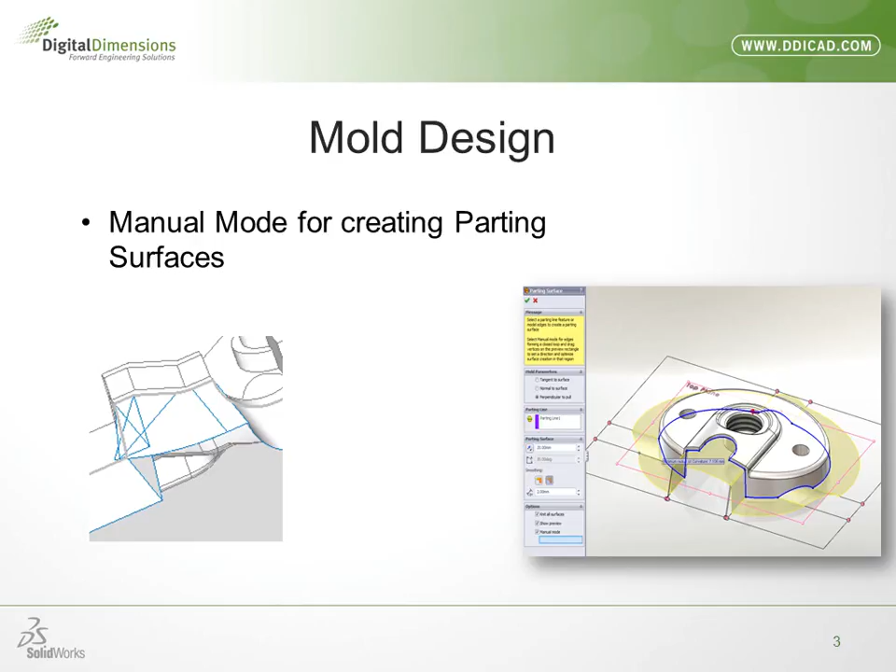Okay, so in older versions I really wasn't allowed to change or modify the surface much. With this new manual mode, it allows me to really grab and pull on it and make something that is truly custom. Okay, so let's go ahead and get into it. I'm going to call up a part here. And I have a parting line already established, just unsuppress it. I'm going to go ahead and call up the parting surfaces command.

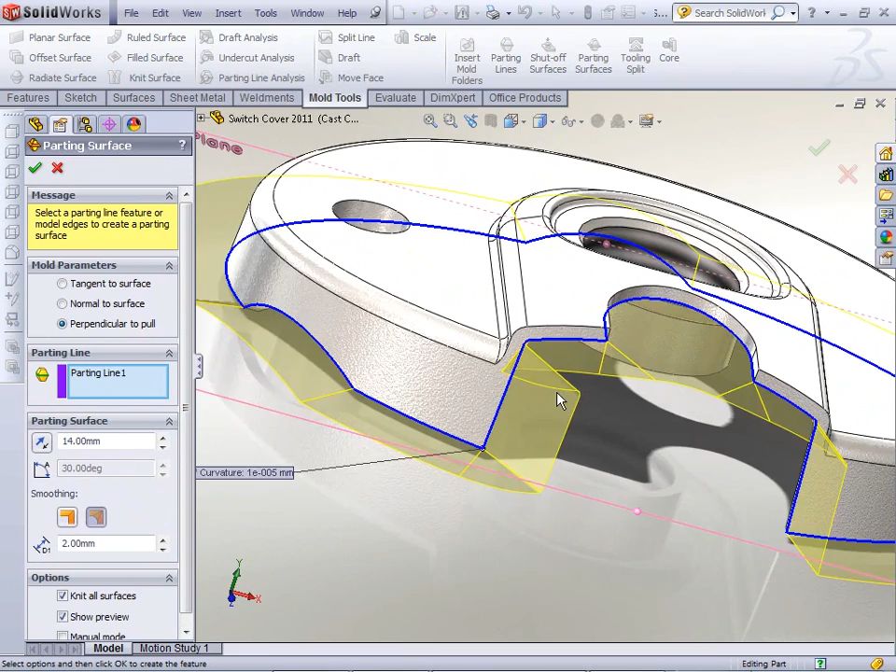Now in the past, with manual mode off, what you would see in a part like this is a really odd surface in a few particular cases. And you'll see right here where the surface is almost folding over on itself because of the geometry in here. And unfortunately, in older versions, this is what I was stuck with. This is what I had to use. In other words, I would have to go in and really do some real surfacing techniques to clean this up. And so there was really nothing I could do inside the parting surface command.

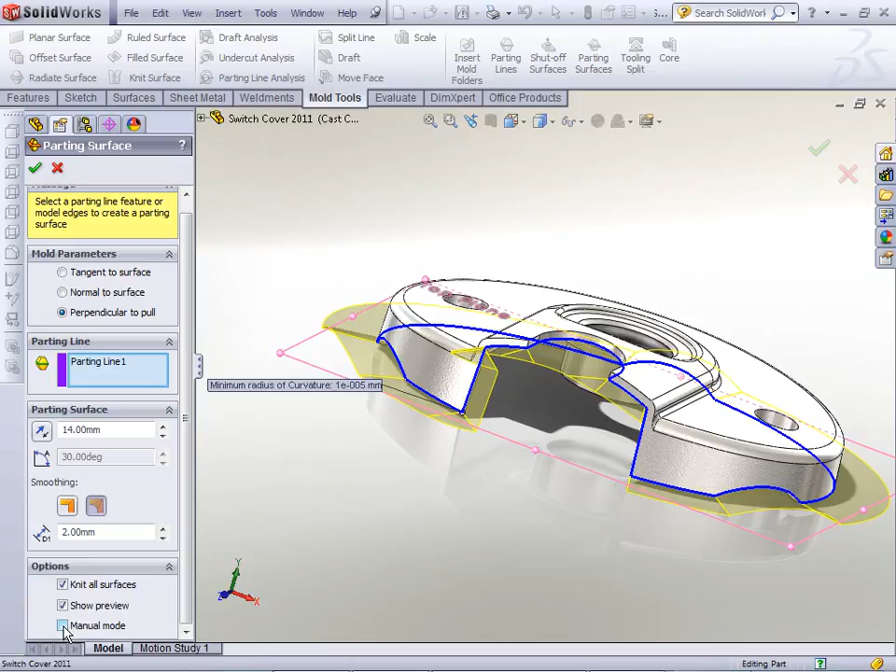With 2011, they've created this new option here at the bottom left in the feature manager. It says manual mode. I check the manual mode, and you'll see what happens is it pops up with a bounding box around the model and a bunch of little pink dots, and these pink dots represent vertices along the split line. They line up with vertices along the split line, and all I have to do to change the model is grab these pink dots and drag them to the alignment position that I prefer.

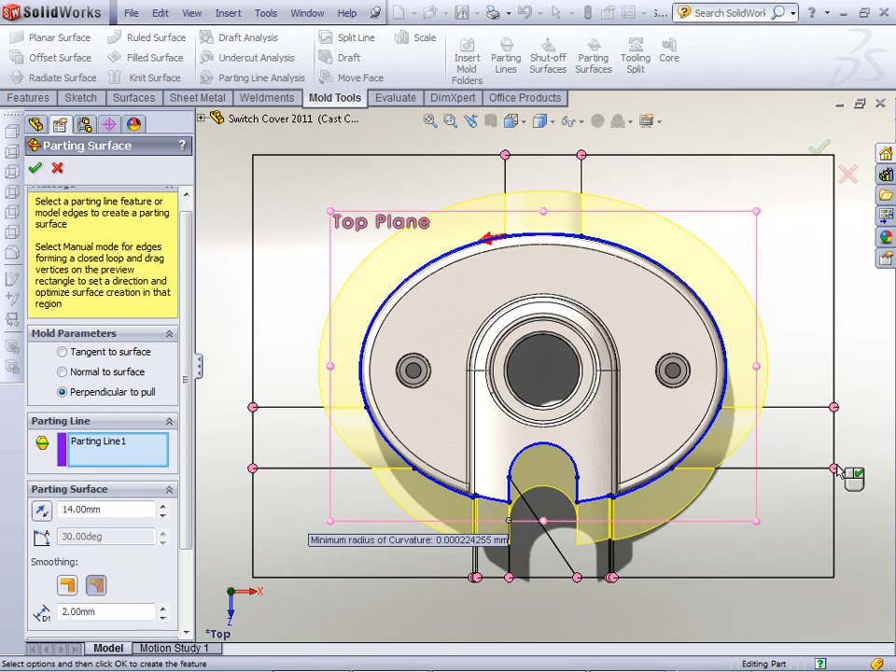So let's say I don't want it vertical, I want it horizontal. I can drag it, and you'll see it kind of snaps to the horizontal orientation, and that reorients the surface. Okay, do the same thing over here. You'll see it snaps into place right at that horizontal position. But again, it allows me just a little more control over the surface that I couldn't have done in previous versions. You'll see that takes that twist out of the surface.

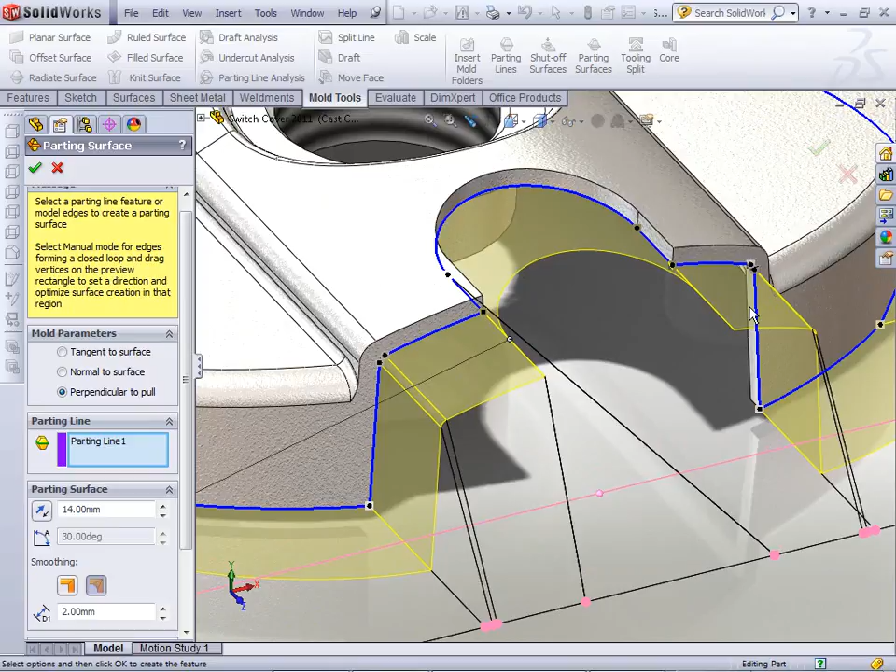The other thing to note is we've created a new command for fill surface regions. So in a situation like this where I have this half arc, for instance, instead of having the half arc open like that, I want to continue a surface from here to here. All I'd have to do is start and end a fill surface region. To do that, you'll notice these little black dots all along the parting line. Those are all locations where I can start or end a fill surface region.

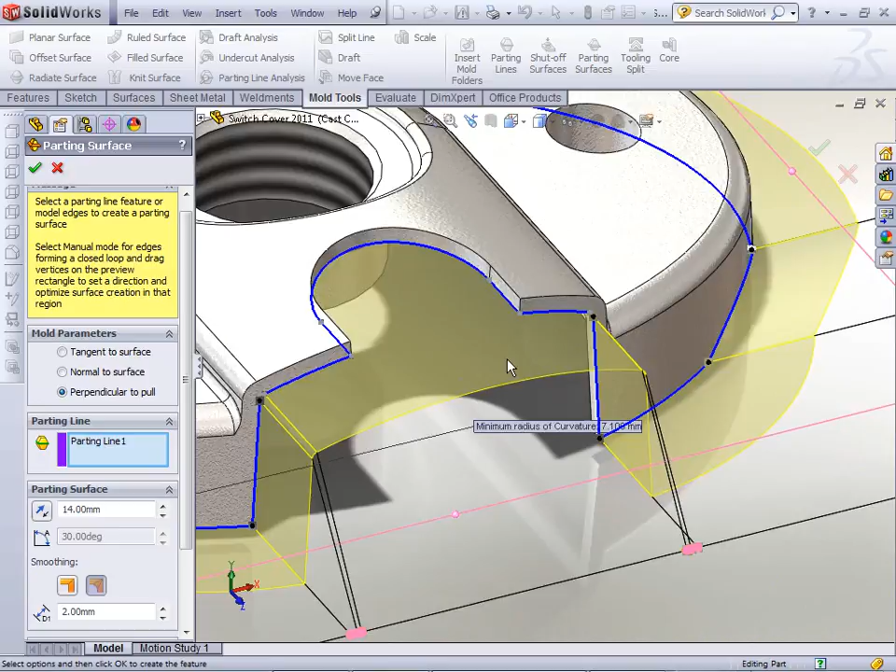So what I'm going to do is come over here, right click on this dot, and this is where I want it to start. So I right click the dot, and you'll see a button here that says Start Fill Surface Region. So I select Start Fill Surface Region. I go to the place where I want it to end, which is this right here. Right click it and say End Fill Surface Region. And that'll create a continuous surface from this dot to this dot. So again, a little more control inside the parting surface command, which was previously unattainable. So that's pretty much it for mold design.

Let's go ahead and get into sheet metal. A couple of minor changes, but they aren't really minor when you consider the workflow and the day-to-day use of SOLIDWORKS. They are pretty major. And a big one is the ability to mirror and pattern. In the past, we could not mirror or pattern edge or miter flanges, and that's no longer the case. The issues always stemmed from how the model handled the bend information for the mirrored instances. So that's taken care of for 2011. It's no longer a limitation.

They've also introduced this concept of a bounding box, which I'm going to describe here in just a couple of minutes. They've made some enhancements to convert to sheet metal, to make it a little more uniform among all the sheet metal tools. And then lastly, there's been some updates to the flat pattern command. I don't have a lot of details on it, but I'll explain some of them when we get to that point. So let's go ahead and get into it. I'm going to go ahead and call up a part.

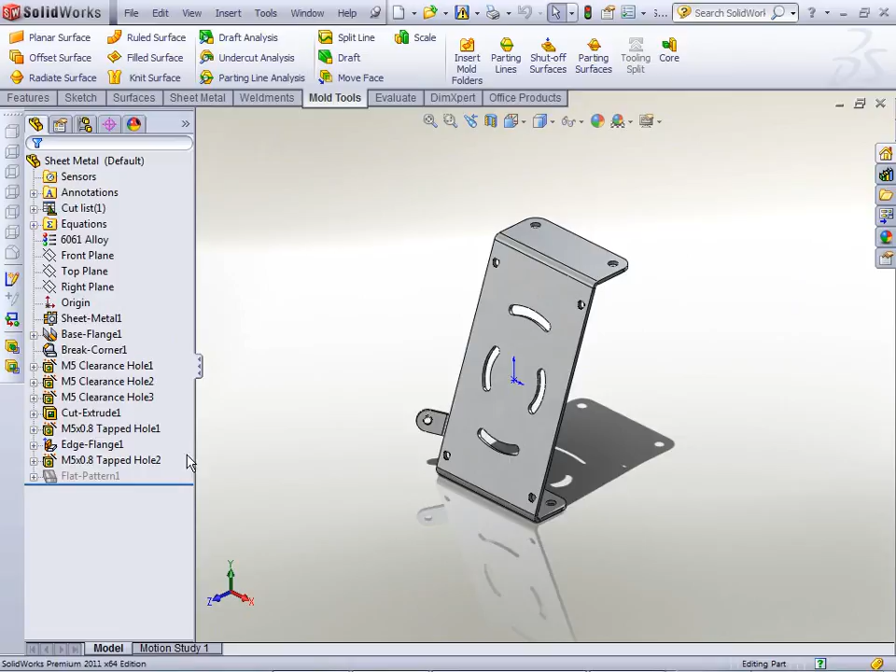And the first thing I want to start off by doing is just showing that we can now do a pattern of edge flanges. Now, not only edge flanges, but custom edge flanges. You'll see here this is a custom edge flange that's been sketched. It's not anything I just grabbed and pulled on. It's been sketched out and laid out very specifically. And in the past, the limitation is we could not do a pattern of these. And that's no longer the case.

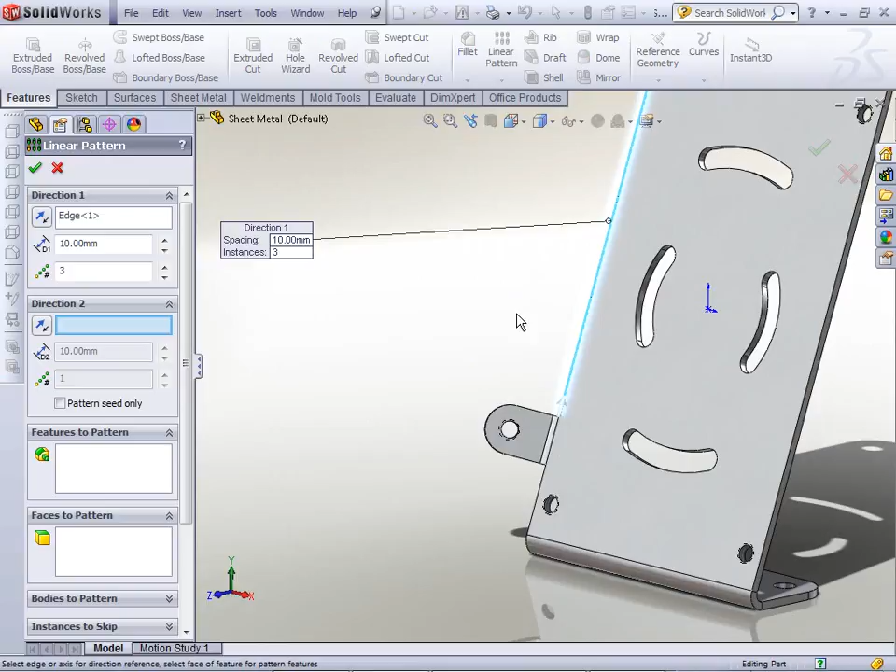I call it the same linear pattern, use the same techniques I'd use for any normal feature, so there's nothing specific sheet metal about it. And then I just select the two features I want, in this case the edge flange and the hole going through it. I set that, I set my space, and I just hit OK. So the workflow really isn't any different than a normal pattern. You'll notice that the bend information is held as a child feature to the pattern. And that's one important thing to note. That's where the bend information is going to be held for those patterned instances.

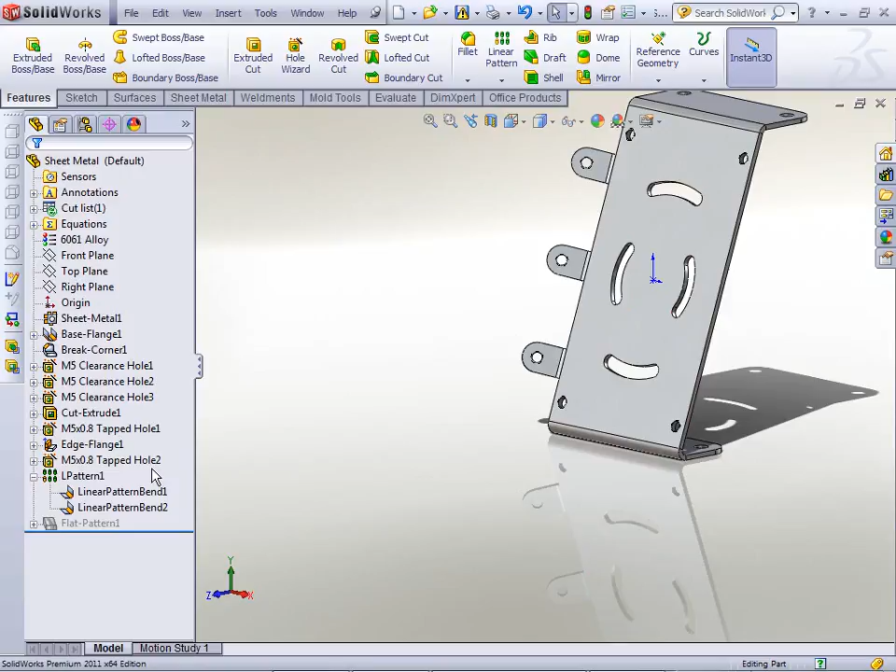Okay. Same thing goes for mirror. When I go to the mirror command, and I'll mirror about the right plane, just select one of the pattern instances. Notice that it picks up not only the pattern instances, but the seed as well. So I hit OK, and it mirrors as well. Also, bend information held underneath the mirror command. You see that. Child features of the mirror command. Okay, so both pattern and mirror supported for edge flanges and so on.

Okay, and obviously the important bit when it comes to working with sheet metal is the flat pattern and the ability to work with this flat pattern. What they've introduced with SOLIDWORKS 2011 is a bounding box. And this bounding box, you'll notice, is just a construction line rectangle that surrounds the SOLIDWORKS model. And it's the smallest possible rectangle that will fit around the model. That's by design. And what's nice is, I'll show you in just a bit, we can also export this. So this could be used in a lot of different situations.

I think the most common would be in a manufacturing environment where I nest models. I need to know the stock size that I'm starting with, and that's an example of where I'd use this. But there are a lot, and I'll show you later on how we can export this out when you're exporting your DXF and DWG files. But there are a couple things I want to point out about how SOLIDWORKS handles bend information. The first thing I want to note is just the length of this overall model. Now if I click on the bounding box edge here, it gives me an overall length for the flat pattern, which is 190.74.

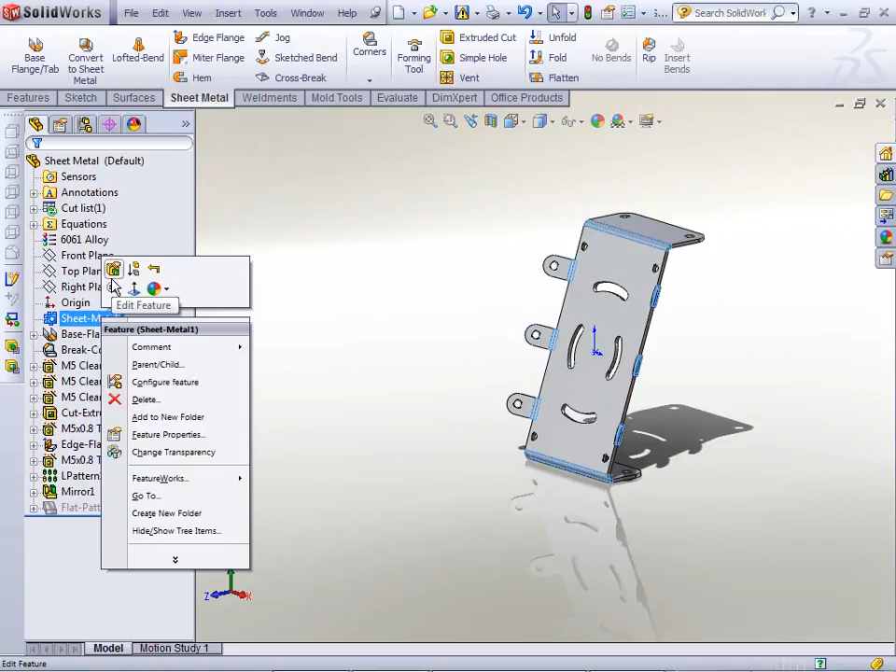By default, the bend information is stored as a K factor. Okay, bend allowance information is stored as a K factor. And in the past, with difficult parts like this, where the K factor may vary because of the bend angle, maybe the bend angle isn't exactly 90 degrees, the K factor information, the bend allowance information, needs to change. And so, in the past, the only workaround really to using a K factor is going into bend allowance or bend deductions. And the problem with those is they can be kind of tedious to set up. They've created a quicker alternative, and it's called the bend calculation. And what it is, it maps to an Excel spreadsheet an equation that allows it to vary the bend allowance based on the actual angle of the bend.

Okay, so what I'm going to do is go back into the flat pattern. I want to point this out one more time just to show how this handles it. With a default K factor of 0.5, this is the overall length. See, 190.74. Now I'm going to change that K factor or bend allowance data to be mapped to my custom Excel file equation. So I'm going to set it to bend calculation. I have the bend calculation already set. So you'll see here. Now really all it is, I'm going to go ahead and call it up, is an Excel file.

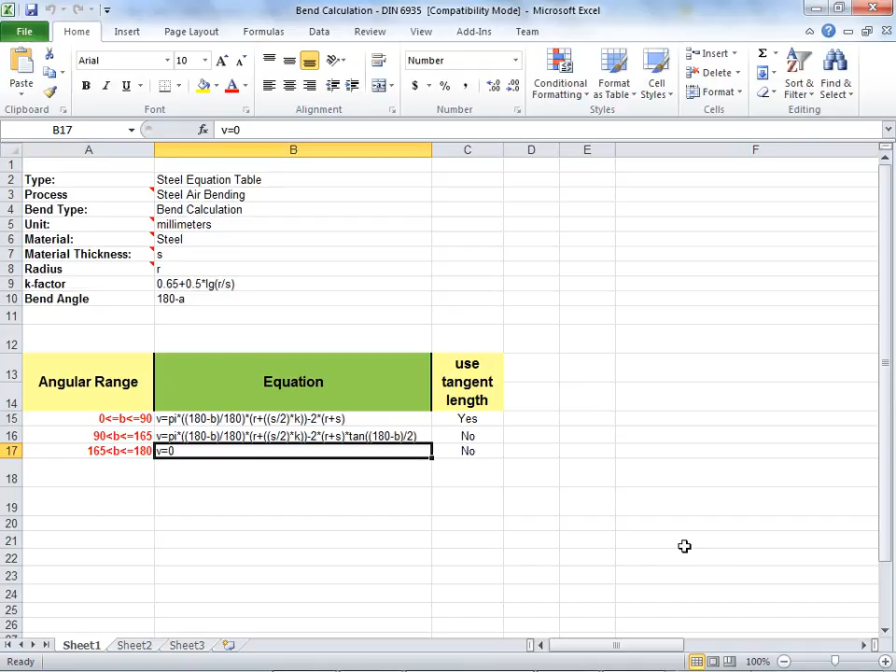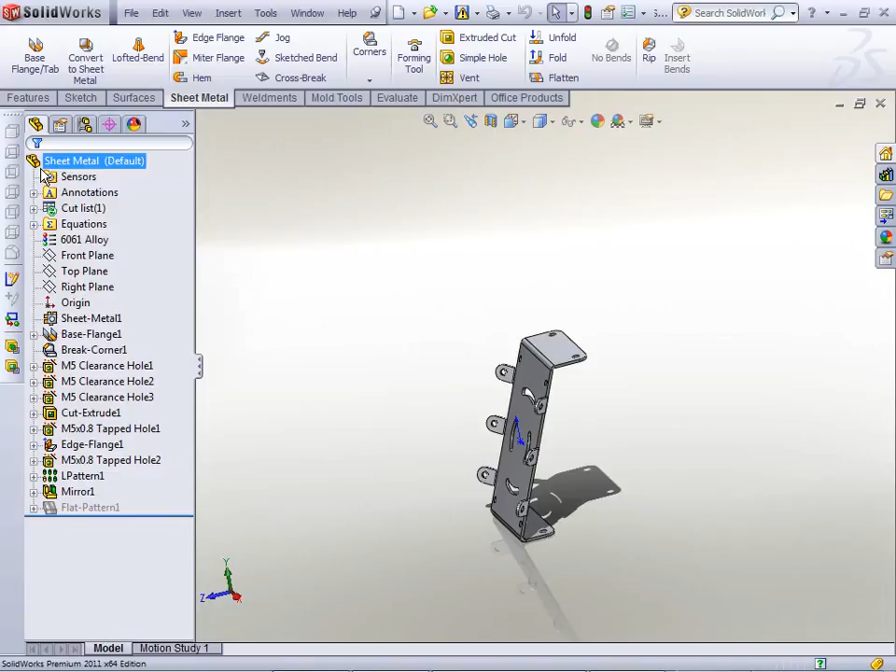Okay, so I'm going to go ahead and close this out, and I'm going to map this bend calculation Excel file to my part, changing the calculation based on the bend angle. So I'm going to go ahead and hit OK, it rebuilds the data, and you'll see it pops up similar to a design table. And now the bend allowance information is tied to that Excel file as opposed to just a default K factor.

And the difference really comes in when I show the overall length of the flat pattern. So when I click on this edge here, you'll see it says 189.64. That was before 190.7 something. So it's 1 full millimeter, or about 40 thousandths of an inch difference in just the bend allowance information. Now that may not be a big deal, but in certain cases it could. It could be the thing that causes it to have a failed model, failed bend.

So there are a lot of different situations for different K factors and even differences in machinery. So there are a lot of things to consider. But what's nice about that bend calculation is it allows me a really customizable setup where bend allowance and deductions were always kind of a tedious manual process.

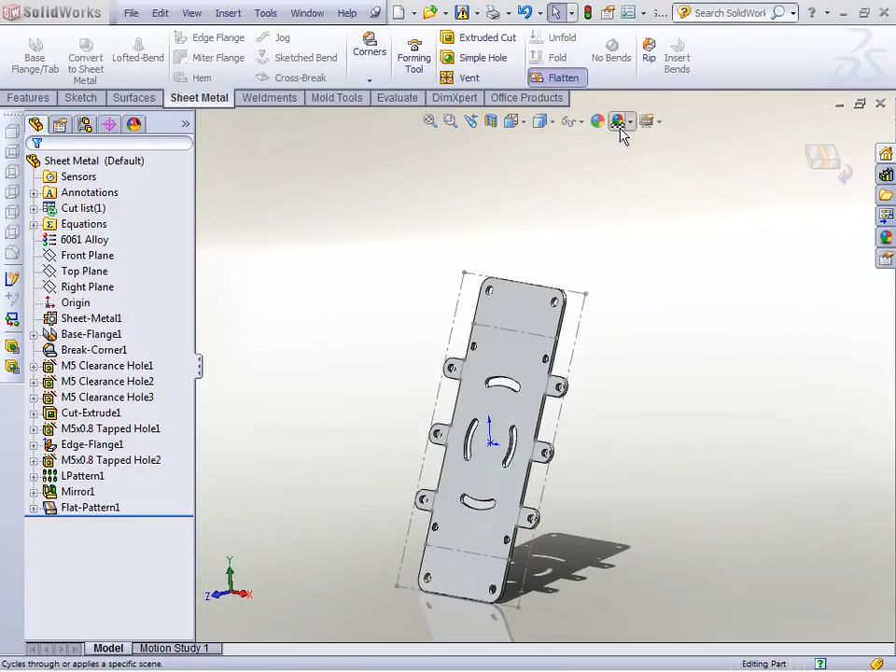So the next thing I'd like to go over, as I mentioned earlier, they've changed the way they handle flat patterns, and I want to show an example of how I can update my old models to reflect this new flat pattern update. So what I've done is I created a real basic model in SOLIDWORKS 2010, and I'm importing it for the first time into SOLIDWORKS 2011.

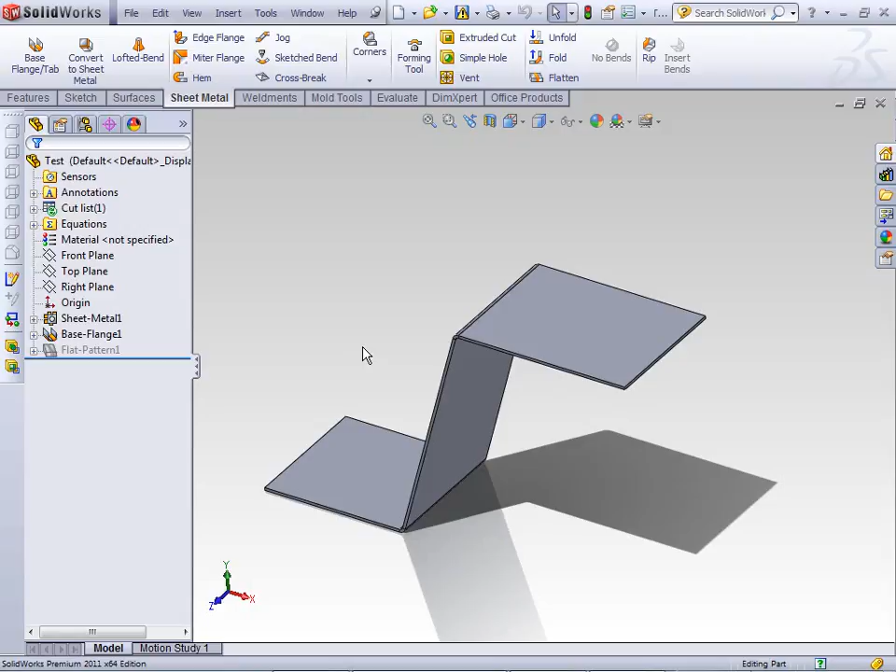And like I mentioned, they've made some changes to how they calculate flat patterns, and these changes support a lot more complex rip scenarios and a lot more complex lofted bends. And so it allows me to do something I couldn't previously do in 2010, which is flatten some of these more complex rip and lofted bend sections. So what I want to show is how do I update my model to reflect these new changes.

All I have to do is right click Edit Feature to the flat pattern, and if the model hasn't been saved yet in the newest version, you'll see this option that says Recreate Flat Pattern, and it recreates the flat pattern to be updated to this new version. And so what I have to tell people is open up your model in the 2011 version, recreate the flat pattern, and then try creating that feature that was difficult or impossible to do in 2010 and see if you still have an issue flattening it.

Okay? So that's the recreate flat pattern option. Again, this is only for files that haven't been opened and viewed yet in 2011. You'll see this. If you created it new in 2011, this option won't be here.

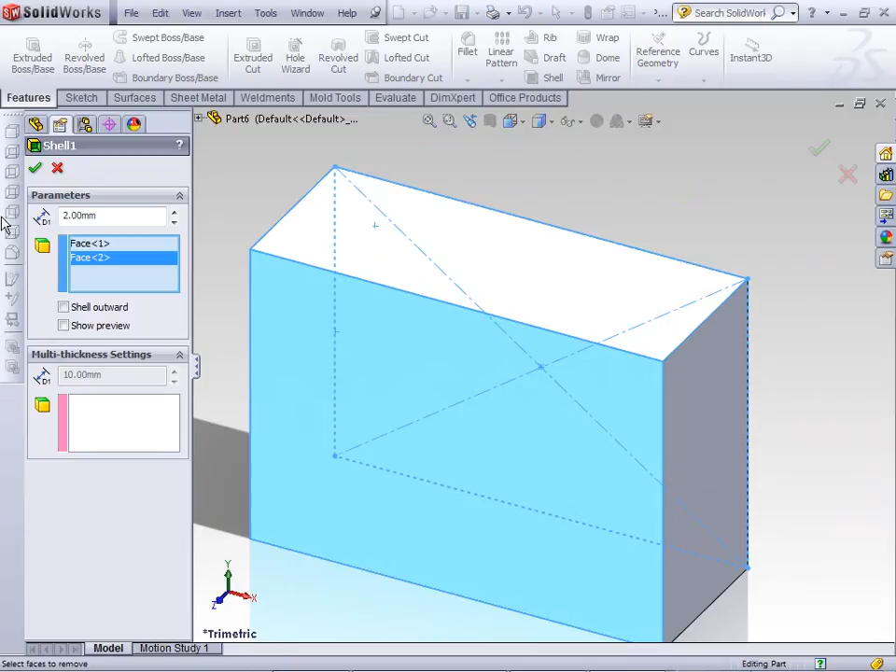Okay, there's one last thing I want to point out, and I can just create a part for this, and that's new functionality to the convert to sheet metal command. Just going to create a real basic block, and the limitation in the convert to sheet metal command is that you had to specify a thickness. You could not specify using a gauge table. Okay, you had to punch in a thickness, which was kind of different because almost every sheet metal command I can punch in a gauge as opposed to a manual thickness.

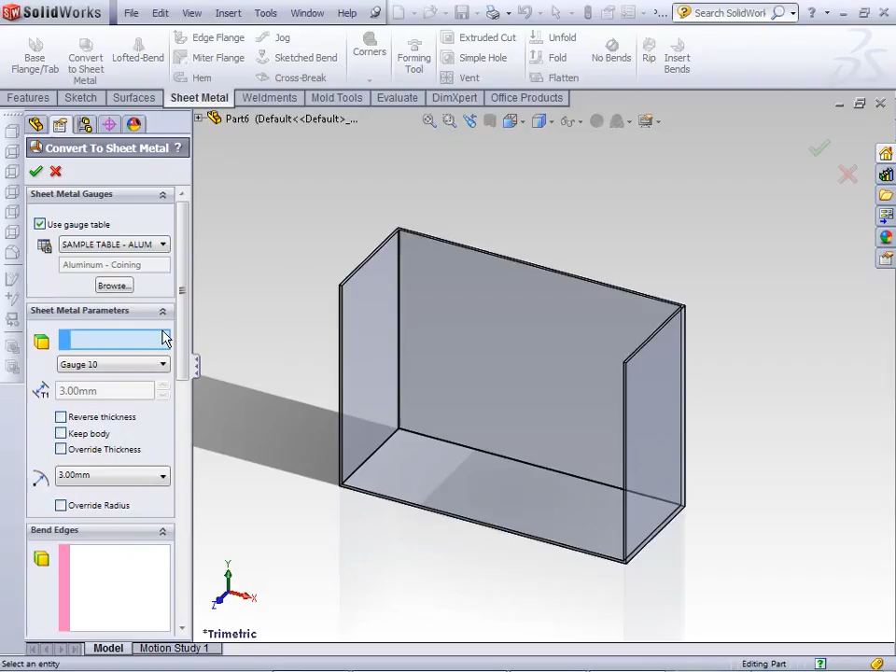So now it's a little more uniform. The convert to sheet metal now supports gauge tables, same gauge table set that I use for a base flange, for instance, and it works in the same way. Okay, so some changes to the convert to sheet metal command. Okay, so that about does it for the sheet metal.

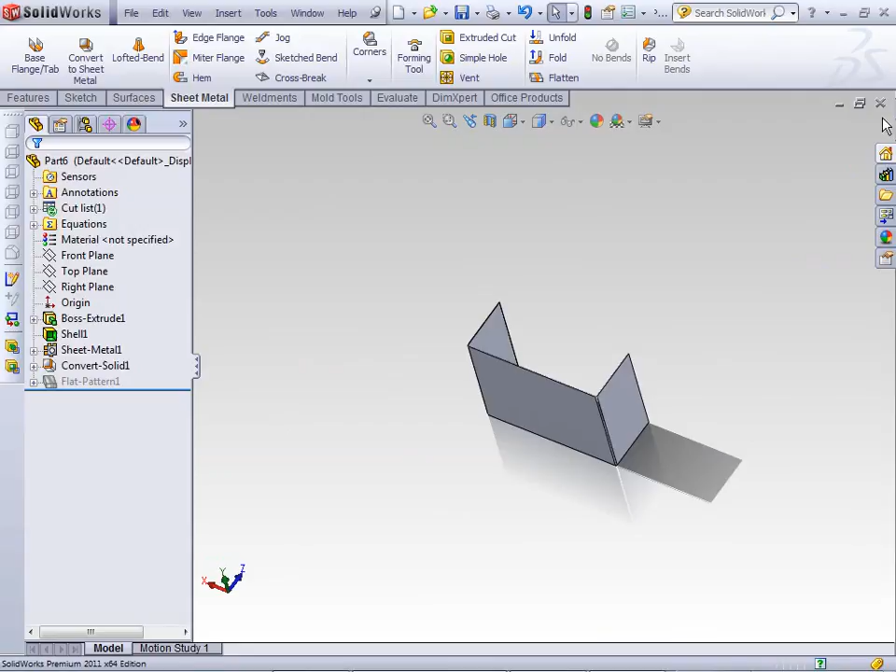The big change for 2011 in Weldments is the addition of the Weld Bead command. And the Weld Bead command is definitely much more powerful than its predecessor, the fillet bead. The fillet bead is still there. You can still create fillet beads, but I think once you've seen what the Weld Bead command can do, you probably won't be using it.

The other additions to the Weldment support are in drawings. The big changes in drawings, we've created a new table called the Weld table, which I'll show you in just a second. And also, Weldment cut list support and things like that have been updated and modified, so we'll get into those as well. Cut lists, some minor changes to cut lists as well, which I'll get into. So let's go ahead and call up a Weldment.

And the first thing I want to note is this is a part, but we're going to get into an assembly as well, an assembly Weldment as well. But I want to show this new Weld Bead command. Notice it even takes the place of the fillet bead on the Weldment toolbar.

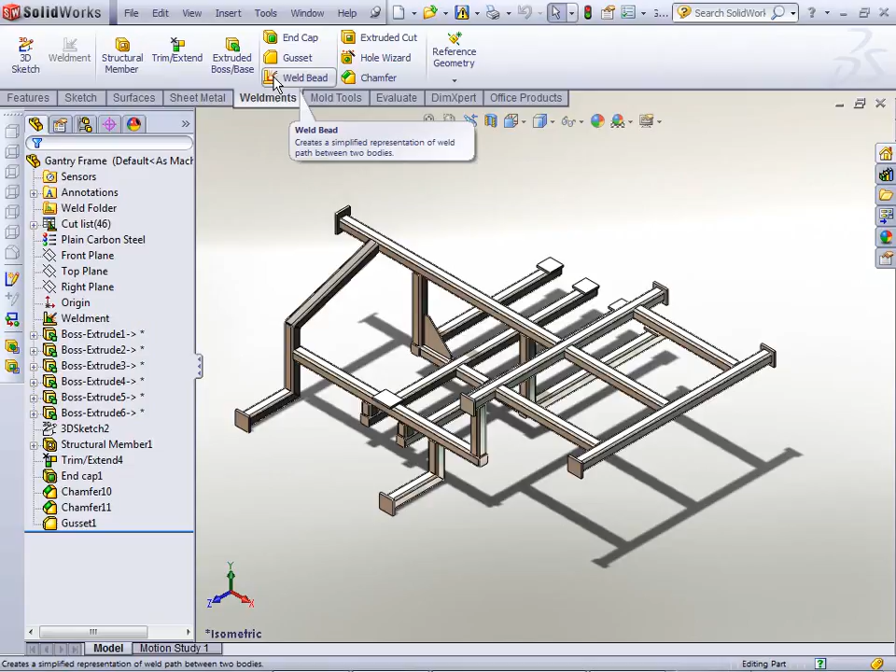It's not that your old fillet beads won't be supported. They'll still be there. You can still create fillet beads if you choose to. But this command is much more robust in how it works. So I just want to show some cases where old fillet beads wouldn't have worked.

So in 2010, if I wanted to weld this piece of square tubing to this at this angle like this, I couldn't have done it. The limitations were because it met at this weird angle, I couldn't create a fillet bead here. That's no longer the case with a weld bead.

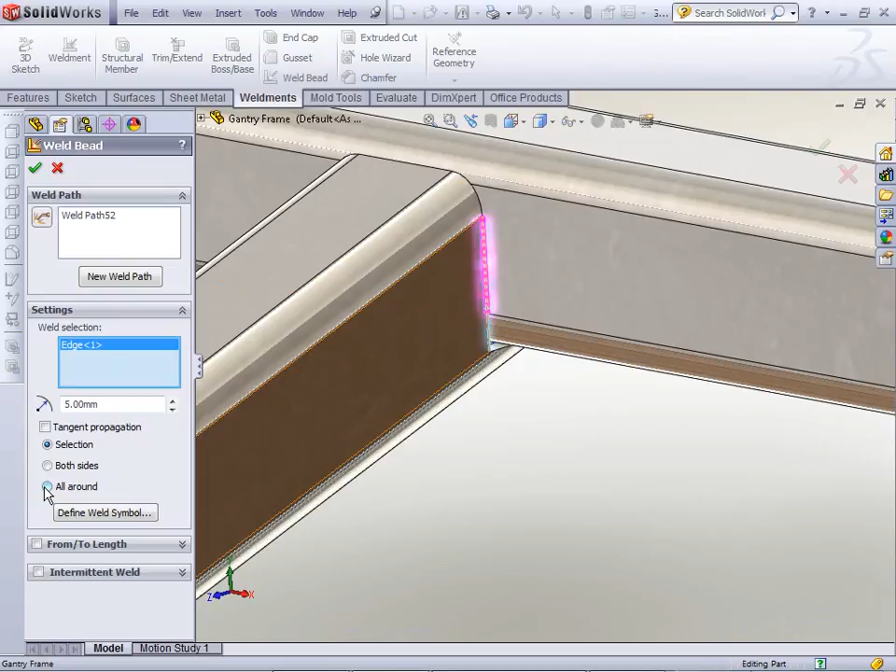I just select the edge I want to weld, say all around for the weld type, and you'll see the pink preview is my weld, and I just say OK. There's my weld bead. Okay. Again, a limitation in 2010, no longer a limitation in 2011.

Here's another one. Because of the radius here in the tubing, the weld wouldn't know how to handle the difference between this and the radius, and that was always a limitation with the fillet bead command, no longer with weld bead. In this case, I could just select two opposing faces. Now I could choose, in this case, and it may make sense, both sides. Say, okay, both sides of the tubing need to be welded, but not all the way around.

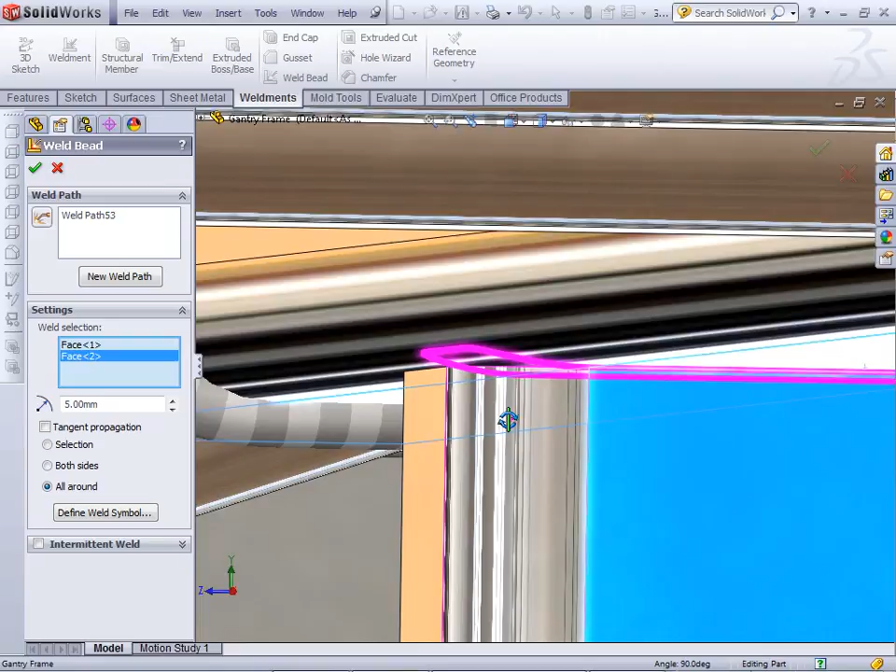But what's nice about the all-around is it'll actually compensate. You'll notice if I zoom in at the right angle here, notice how it actually ramps the weld up to accommodate for that radius. Okay, so definitely new functionality there.

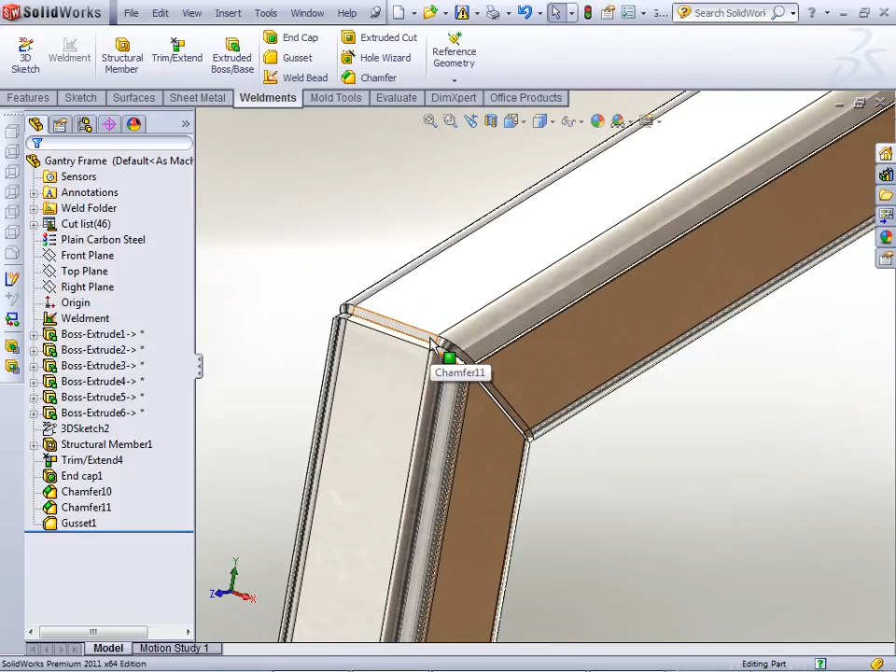Okay, so a couple others. If you actually did weld prep, and this always stumped me, if you actually went through the effort of adding the weld prep, the chamfers on the end of the tubing, you couldn't actually add the weld, and that was again a limitation of the fillet bead command. No longer the case for the weld bead. I select the two opposing faces of the weld groove and just say all around.

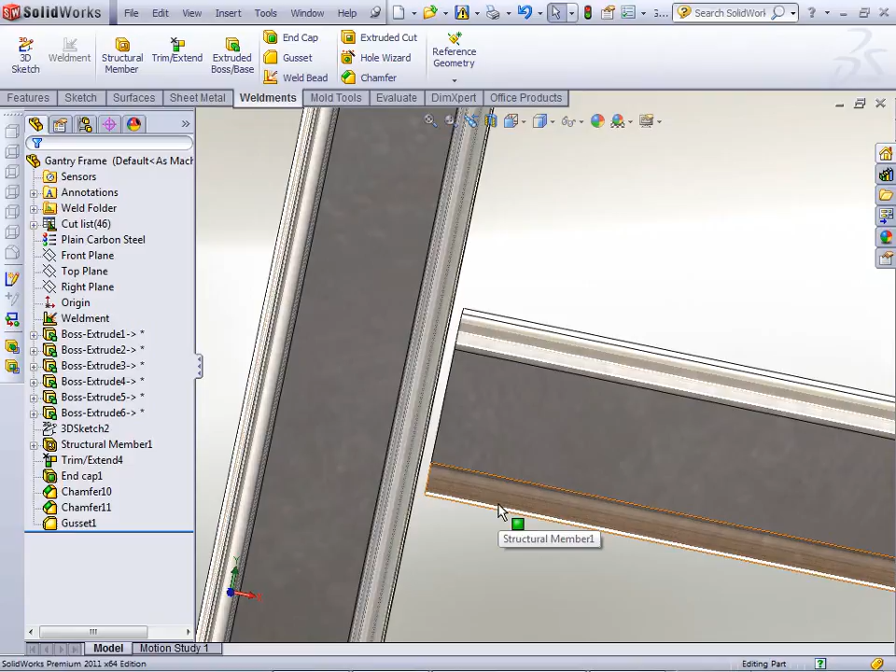Okay. Lastly, and one of my biggest nitpicks was gaps. They introduced the ability to add gaps either last year or the year before, but you couldn't actually weld the gaps shut. Okay, so now, again, no longer a limitation. Select the two opposing faces, say all around.

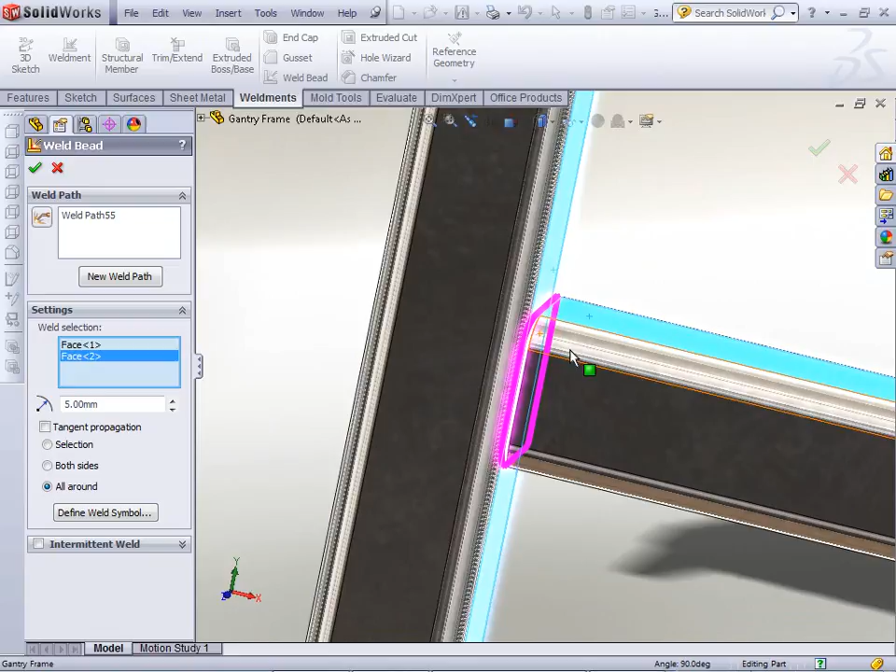One thing I want to note about this is it creates a virtual intersection between the two. Notice that the pink preview is not actually touching either face. So it creates an intersection between the two, and that's where it creates the weld, which is, I think, a lot of the limitation of the previous Fillet Bead command. So I have that, I hit OK, and there's my welds.

They've also introduced some new functionality, and I want to go over that as well. So in this case, I want to weld this gusset to the tubing. So I just select the two faces, and you'll see my pink preview show up. And I want to go over the option for an intermittent weld. You'll see it here at the bottom. And if I check this, it allows me to create intermittent welds as opposed to one solid bead.

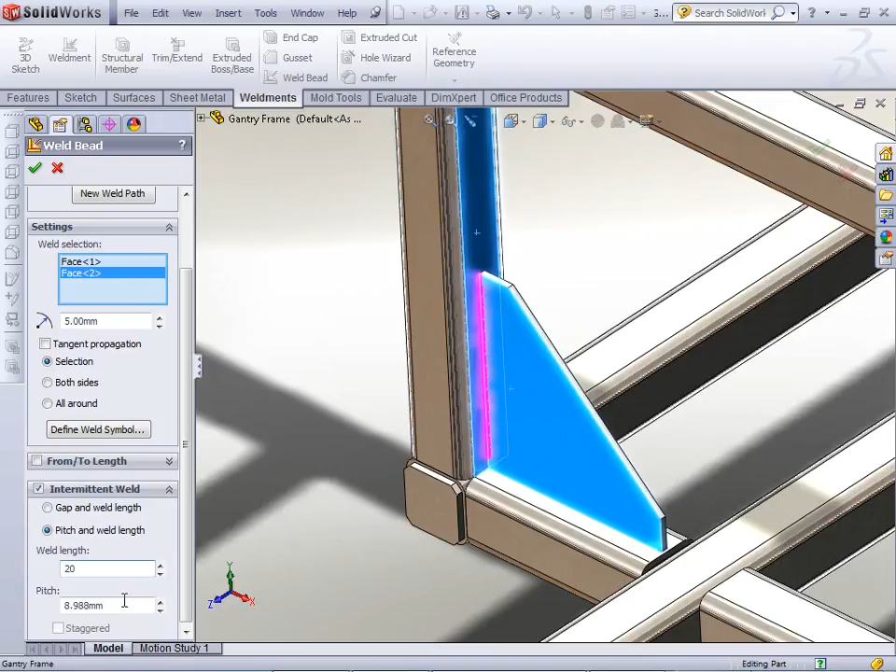So I'm going to set this to pitch and weld length. I'm going to set my weld length to 20 and my pitch to 30. And you'll see it creates an intermittent weld. Now I also want to duplicate this to the other side, so I'm going to check both sides. You'll see that puts it on the other side of the gusset as well.

And lastly, I want to stagger it on either side of the gusset. So I'm going to check the staggered option here, and you'll see it staggers it on either side of the gusset.

Okay, so that's an intermittent weld. Next one I want to go over is this from to length option. In the past, I was always forced to weld basically the length of the edge or the face that I defined by. And in this case, you'll see the preview. Basically, the weld length is the length of the model.

Now I can actually customize the length of the weld relative to its edge by clicking this from to length option. And what happens when I click that option, you'll see arrows pop up on either end of the weld. And all I have to do is grab those arrows and drag to manually change the start and overall length of the weld. One thing to note about the way this is defined is you're not defining the start and end length, you're defining the start and overall length.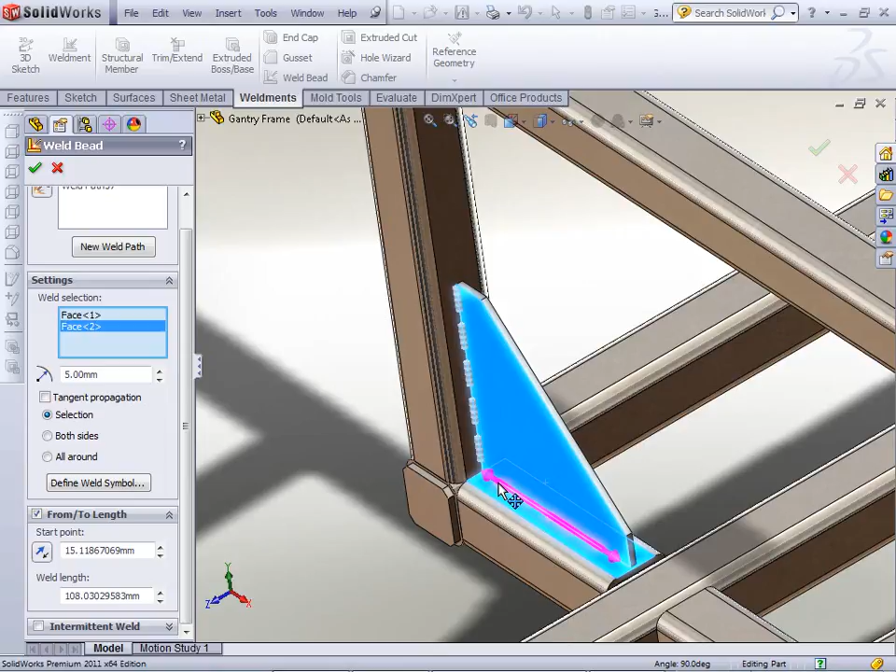And that's why when I grab on this now, I'm not changing the start and end length, I'm just changing the start and overall length of the weld. And so if I wanted to make the overall weld shorter, I'd have to grab this arrow and drag it. Okay. Just one of the things about the way it works. I'm also going to check both sides here because I do want it to weld on the other side of the gusset. And I can just hit OK.

Okay, so that's intermittent welds, from to welds, two new options in the new weld bead command. Okay. So I want to take the opportunity to show some of the enhancements to assembly welding as well. I'm going to go ahead and open up an assembly.

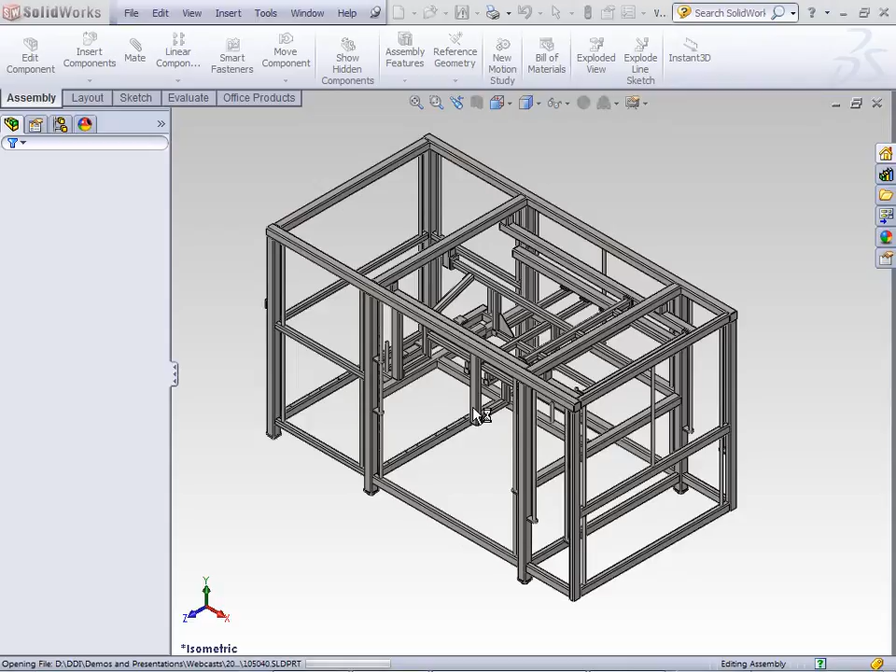Here we go. And the limitations in the past were I could not do the weld prep or the welds right here in the assembly level, and it really kept people from working in weldments and assembly levels. You really did all the weldment work at the part level. That's no longer the case with 2011. I have two new options to assembly features, and those are chamfer and weld bead. What's nice about that is I can do my weld prep and my weld bead right from the assembly level, and there's some quick automation tools that make doing a lot of them in bulk very quick.

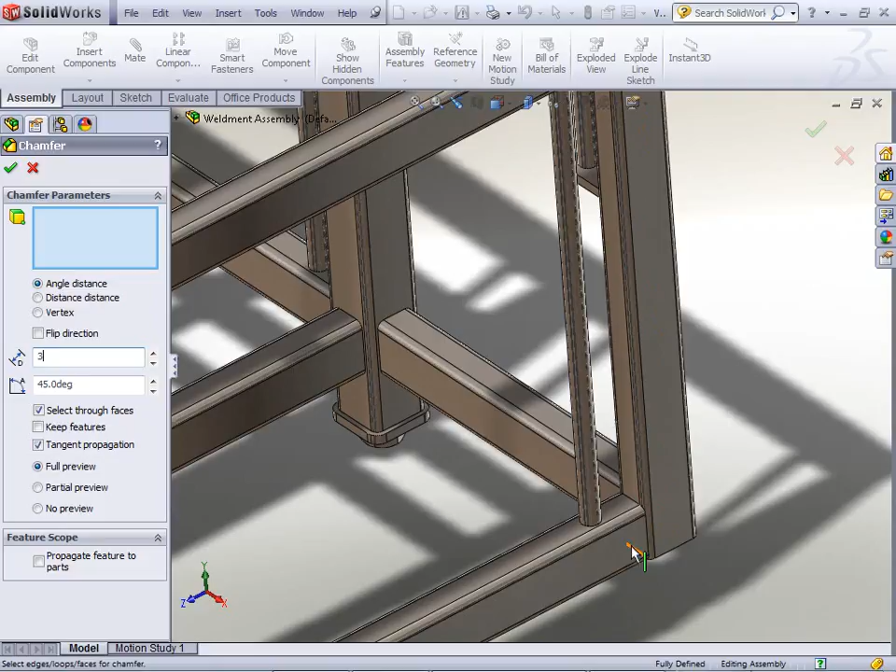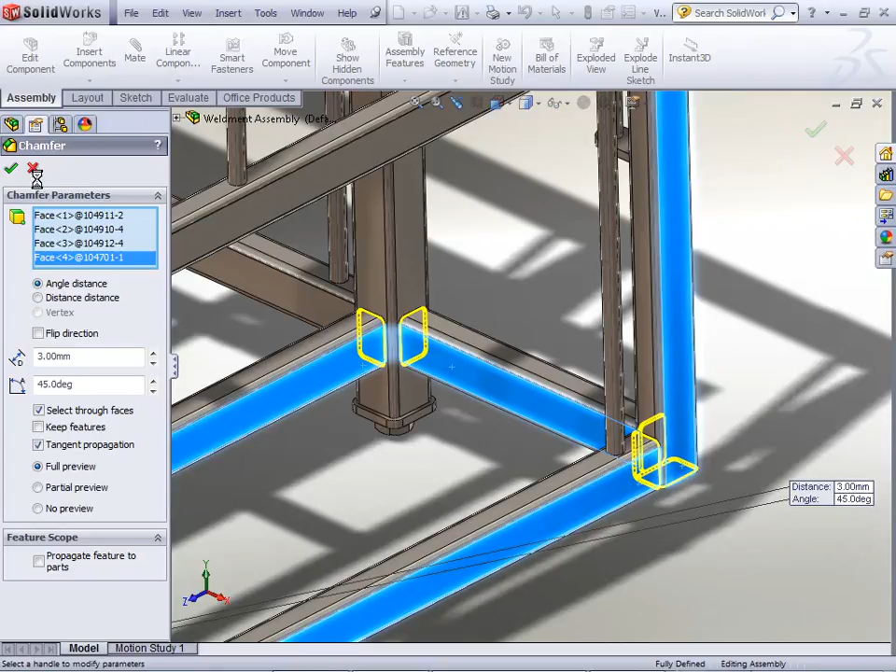So let's go ahead and call up the assembly level chamfer command, the assembly feature chamfer. I'm going to set it at 3mm chamfer, and again, what's nice about this is I can just select faces, and it will chamfer the ends of the tubing. Okay, so a very quick way of selecting multiple faces at once. So then once I have that, I just hit OK. You'll see it adds the assembly level feature here, chamfer 1. And now I can go to the weld bead command. If I zoom in here, you'll see the weld prep there.

Now what's nice about the weld bead command, and we didn't go over this in the part level, is, for instance, I can select these two faces, say, okay, I want the all-around weld. We did that before. There's also this tool for selecting multiple welds at once. Now the limitation would be, okay, do I have to come in here and select this face and do that again, and then this one again as a separate command? It gets kind of tedious, especially when you could have potentially 50, 100 of these to do.

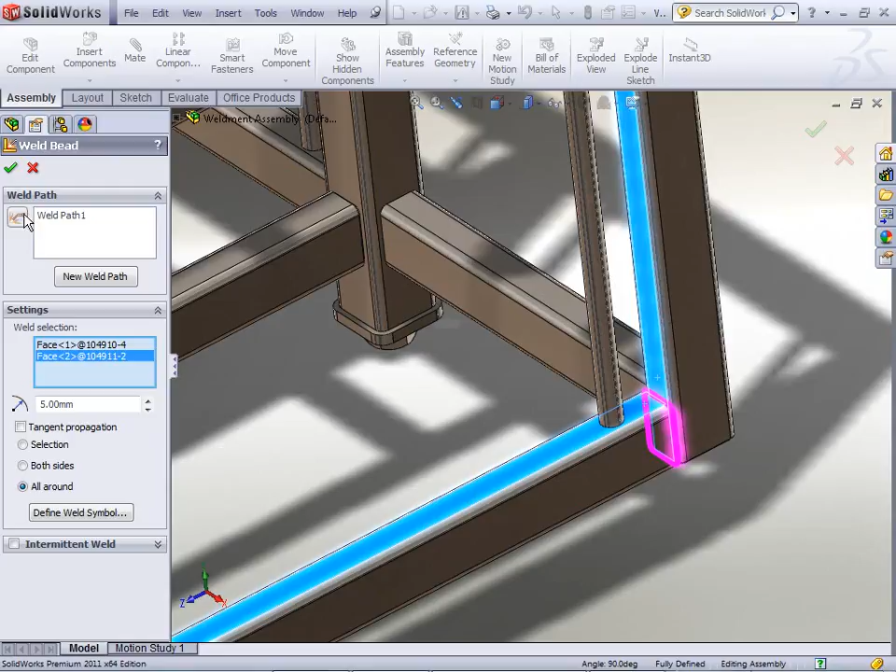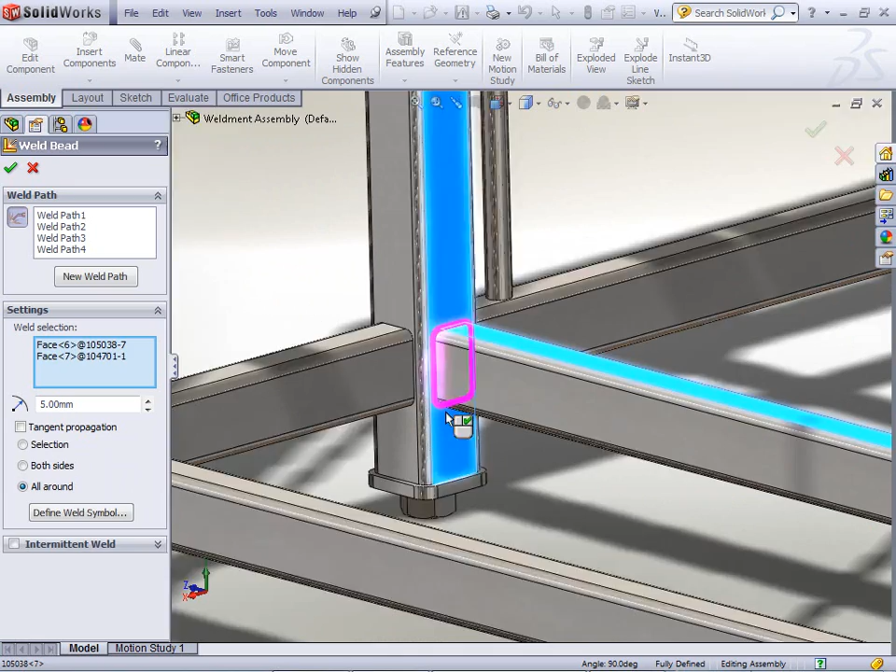So the Smart Weld Selection tool makes it quick, because all I essentially do is drag this pencil over the joint that I want to bring together. Now it is kind of finicky in how it works. You want to be very careful about the faces that you highlight when you're sketching with this pencil. But if you get it right, it's a very quick way of defining multiple faces to weld at once. You see, defining all these faces at once.

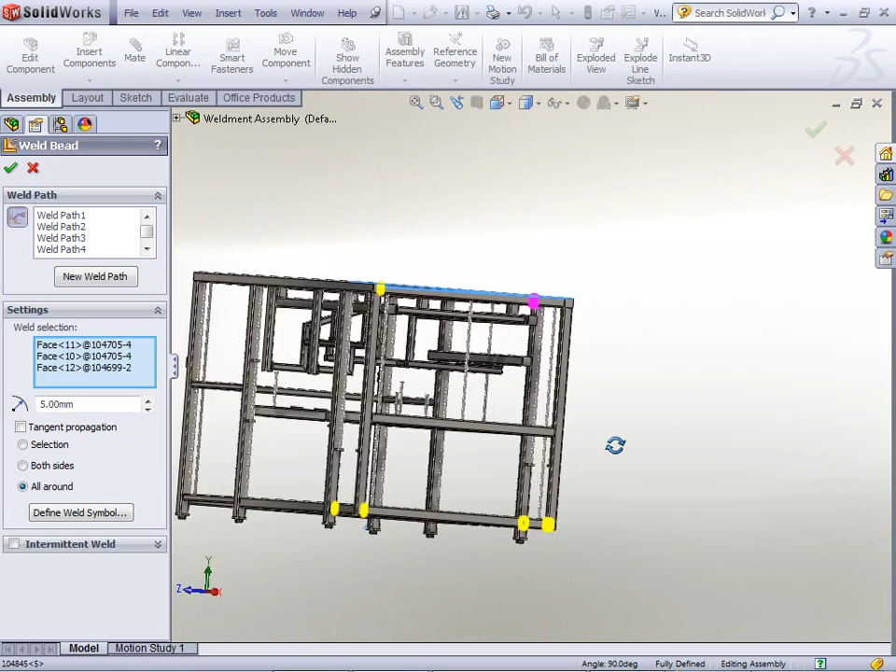It doesn't necessarily have to be the faces I defined with weld prep. I can just define two edges here, maybe over there. Okay, so it's a very quick way of selecting a lot of different weld locations at once. Again, the key to it all, though, is be very careful and very deliberate about which faces you highlight with this tool. Okay, so once I have all my faces highlighted, just hit OK, and there are all my welds.

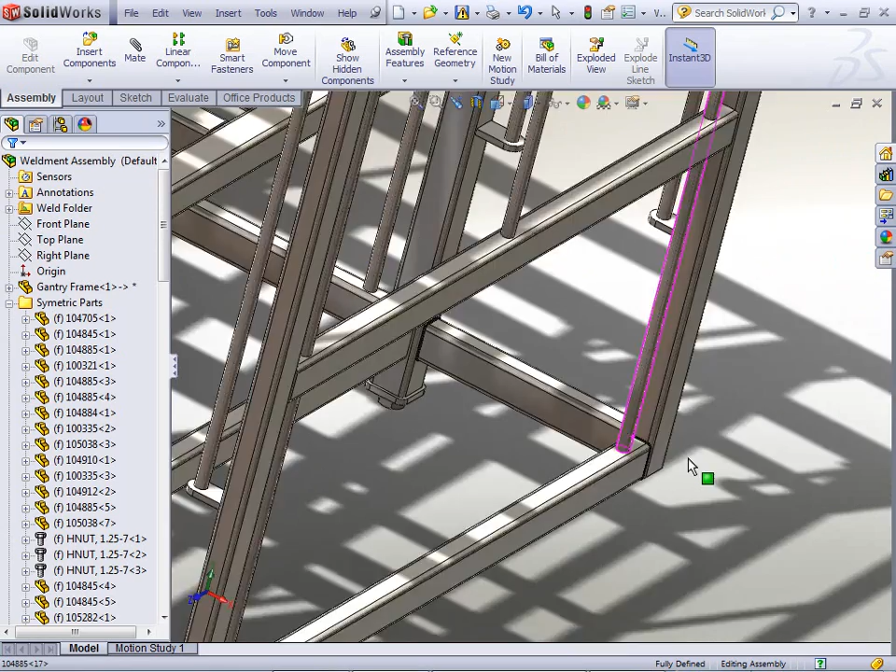Okay, so that's some of the additions to weldments and working with weldments in assemblies. The next bit I want to get into is some of the enhancements to drawings.

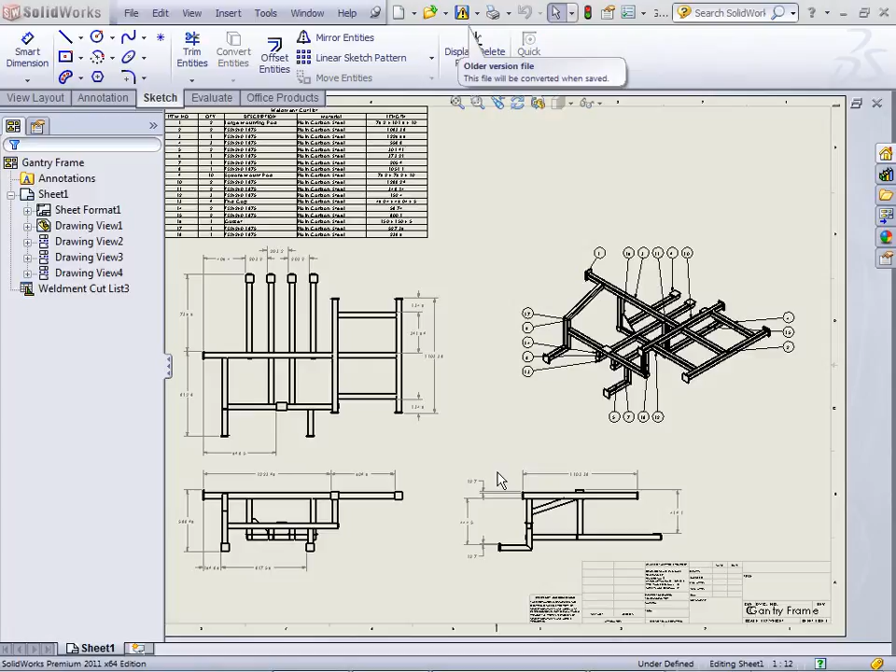The first thing I want to go over when it comes to drawings is cut lists. The limitation in cut lists in 2010 and earlier versions is they didn't behave like a true bill of materials, meaning you couldn't reorder them. For instance, if I didn't want the end cap as number 13 but rather at the bottom of my list, all I'd have to do is grab and drag in a bill of materials. But the limitation was you couldn't do this with older versions of SolidWorks - in a cut list, you got what you got, and you couldn't drag and reorder things.

That's no longer the case with 2011. It behaves just like a bill of materials now. So if I can capture this, it also reorders the balloons - this gusset here is number 15, and you'll see if I drag it down to the bottom, it reorders to number 18. I don't know if it captured that with the resolution, but it reorders the balloons, behaving essentially the same way a bill of materials would.

Maybe what I'm shooting for is putting all these structural members together in a nice clean order. So again, I can now reorder the weldment cut list just like a bill of materials.

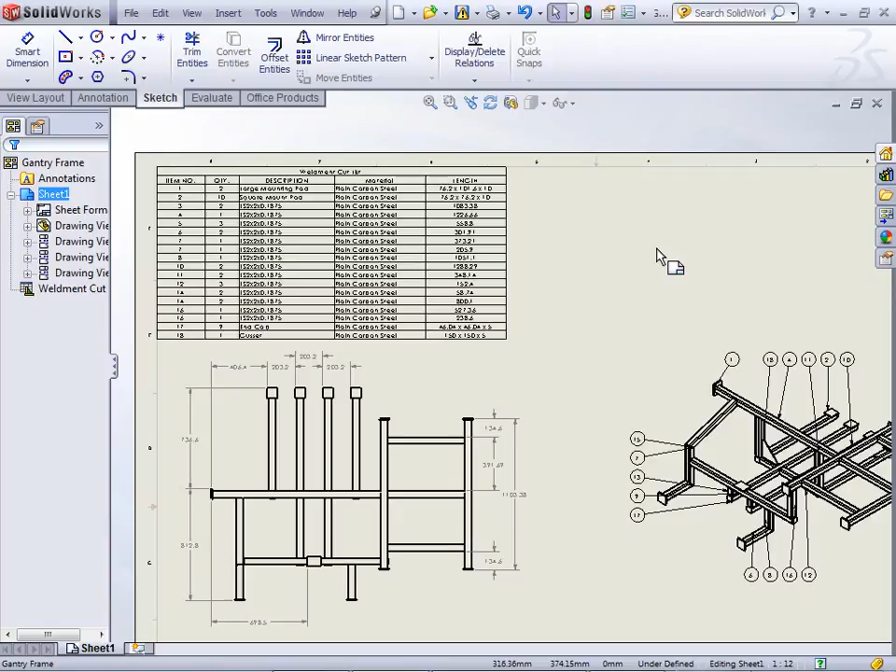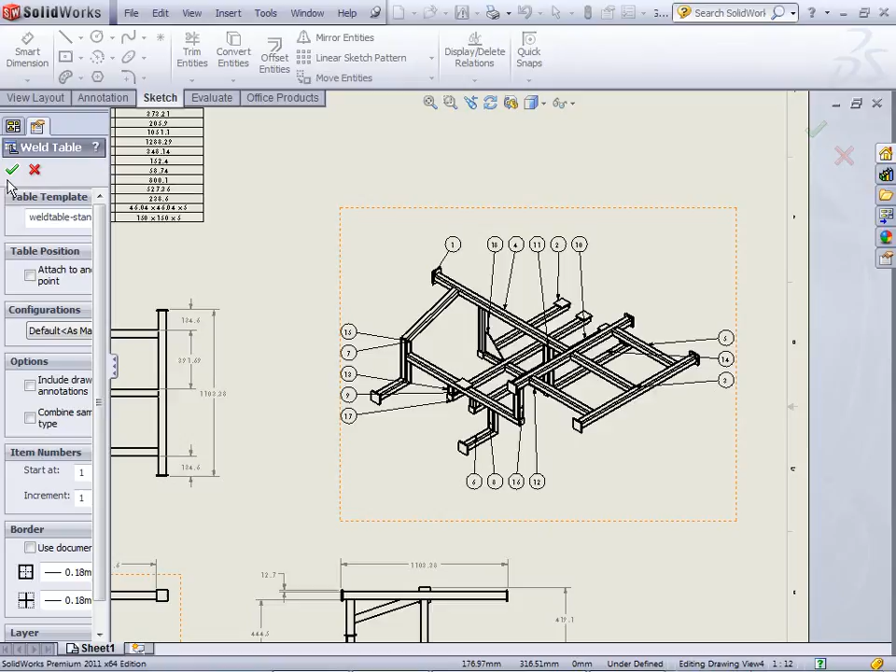The other thing I want to point out is a new table. SolidWorks created a new table to handle all this new weld information we're putting in, and really it's just a summary of all my weld information. It's under the usual tables menu, so either insert tables or just right click in the view and go to tables. You'll see it's called the weld table, so I select weld table. I'm just going to use the default template and put it up here in the corner.

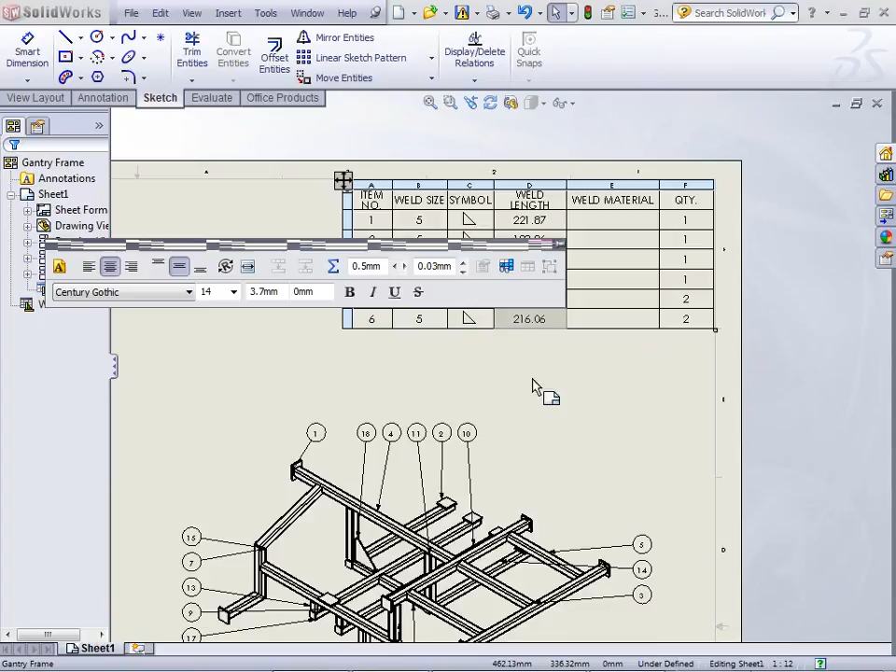I just want to point out some of the things it highlights: weld size, overall weld length, the symbol attached to it. If I established a material, it would pop up here as well - this is part of the default template. And also the number of times that weld occurs. So really just a general breakdown of all the weld information I've added at the part level.

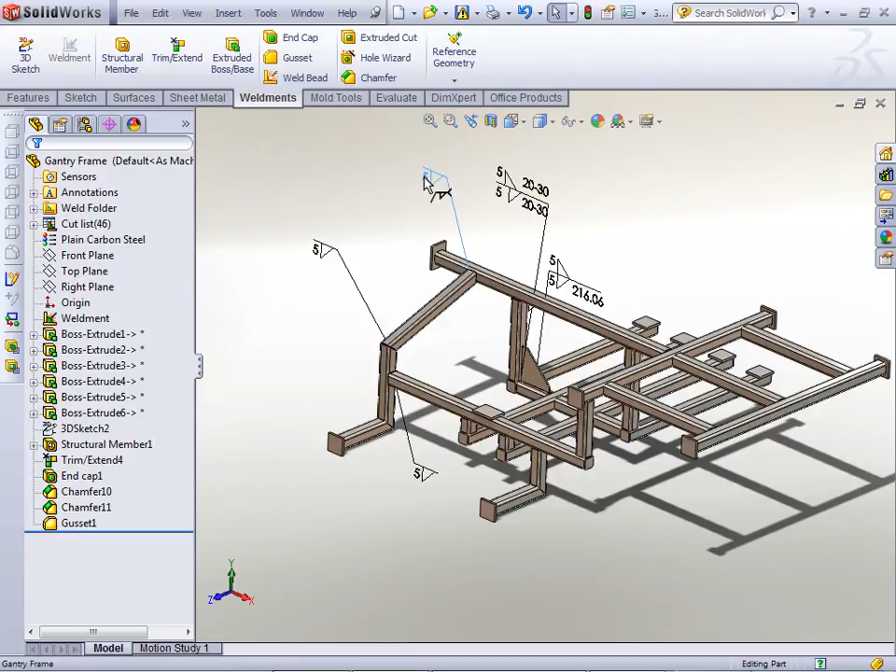Just a couple last things I want to point out with Weldments and the Weld Bead command. The first thing to note is these also add annotations - I just had them turned off. So if you're used to seeing annotations at the part level, the Weld Bead command also adds them, it's just I had them shut off. Keep in mind the annotations are there at the part level as well.

The last thing I want to note is the cut list icons and the behavior has changed a bit. The first thing you'll notice is the icons have changed - they now map more closely to what bodies they actually are. In the past these were all the same, now you'll see structural member icons, regular body icons, and even sheet metal specific icons. So the icons in the cut list have changed, and you can also drag and reorder.

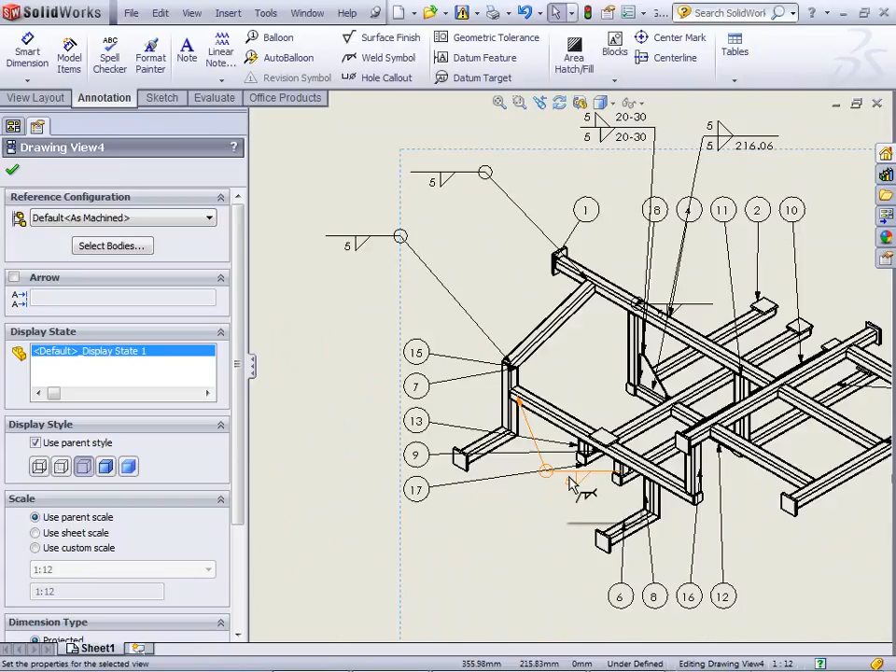So that's the changes to cut lists, and really the changes to weldments in general. The last thing I want to point out is at the drawing level, inserting these same weld symbols is supported. So I can get all my weld symbols here as well - the weld bead command obviously creates them at the part level, but also creates weld symbols for the drawing that I can insert. Really, that was the same behavior I get with the fillet bead command, so I just want to point out that they are compatible in that way.

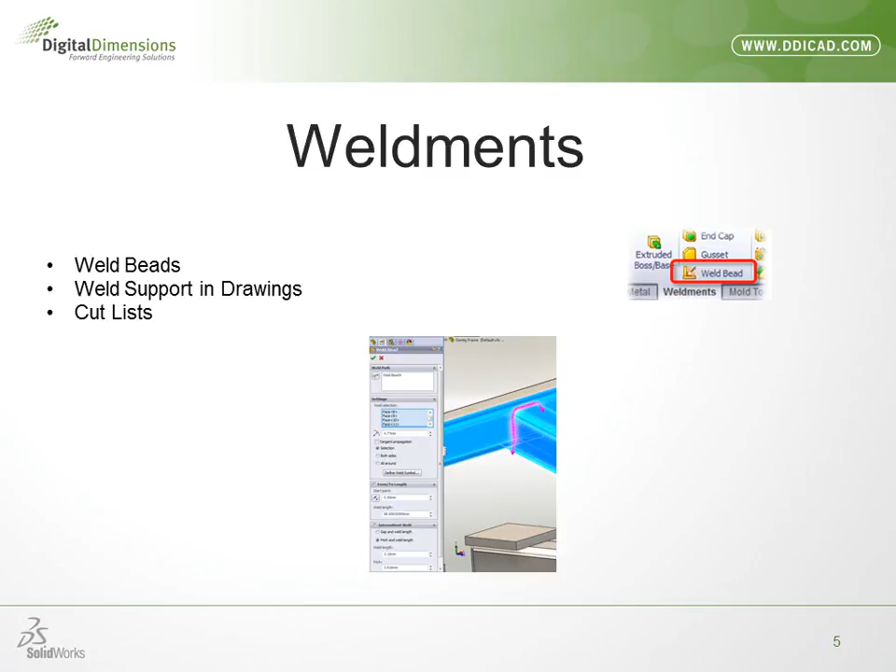Okay, so let's move on. Some of the different import and export changes for SOLIDWORKS 2011.

So the bend line direction, I can map the bend line direction to a specific layer of the DXF while I'm exporting out of SOLIDWORKS. That's one of the new bits of functionality. Also, they made some changes to the DXF DWG import wizard, making modifications that make it easier to bring your DXFs into a 3D model.

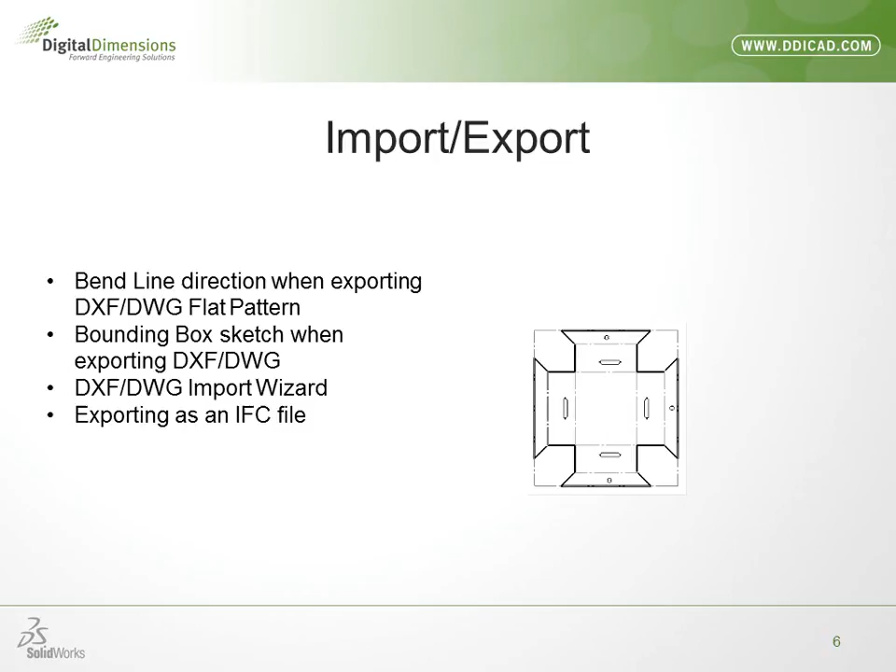And then lastly, we've added export compatibility with IFC. I'm not an IFC expert, but from what I understand, it's mostly for buildings and construction information. For that industry, it's fairly common. So we've added the capability of exporting as an IFC 2x3 file, and I'll show you that export option, although I'm relatively naive when it comes to that industry.

So let's go ahead and get into some of these DXF options. I'm going to go ahead and open up that sheet metal part I was working on a second ago. And of course we introduced the ability to export a DXF.

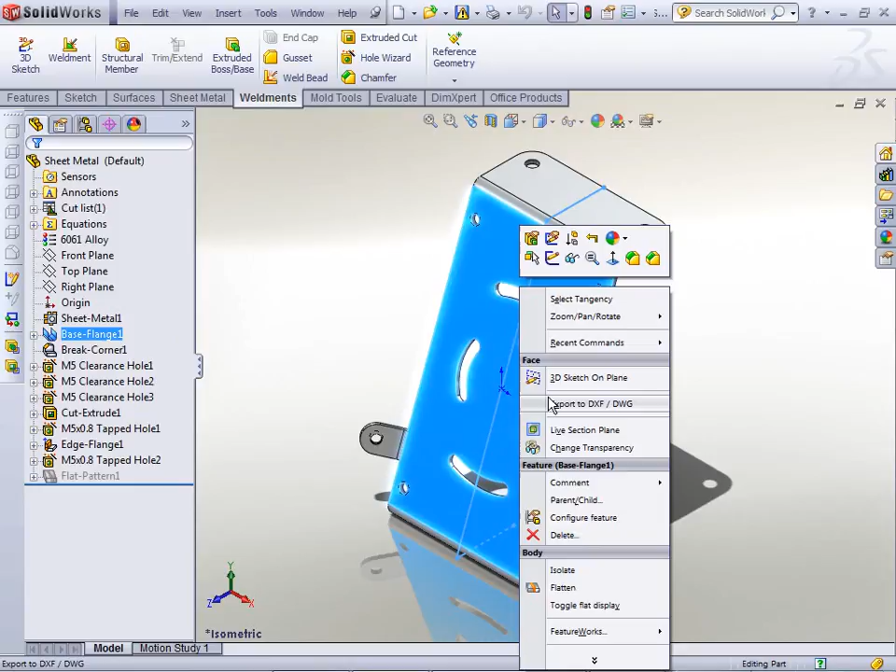I can just right click a part, export DXF. I think this was either last year or the year before. So I right click, export to DXF, save the file, I'll just save this to the desktop. And the export options are here, so I can choose what kind of information I want to export under sheet metal. And of course we have bend lines.

But what's new is we have the bounding box information. That bounding box I showed you when we went into the flat pattern, I can also export it as well with the DXF. So if I check bounding box, I hit OK. This is really where the new functionality comes in.

SOLIDWORKS to DXF DWG mapping allows me to map specific SOLIDWORKS entities to specific layers of the DXF or DWG. So for instance, let's say I have layer 0 here with this line style, and I want to set that to the geometry. Then I go layer 1.

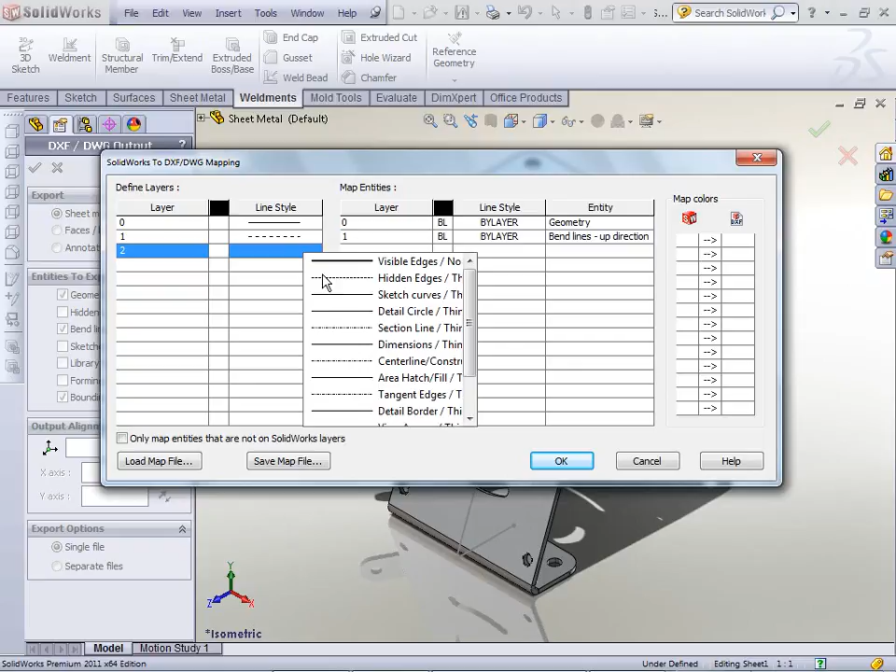That line style, I want to set this to bend lines up. Okay, we'll go layer 2, and I want to set this to bend lines down, and lastly layer 3 - again, I'm not really original on names, but you kind of get the point - I'm going to set that to bounding box.

It allows me to specify specific SOLIDWORKS entities that are going to be mapped to specific layers. The limitation in the past was, okay, I export as a DXF and I show these bend lines, but how do I know whether they're up or down? This kind of solves that because it allows me to specify all the up lines on one layer, all the down lines on one layer, and it makes it really easy to differentiate between them.

So that's some of the new SOLIDWORKS to DXF and DWG mapping options. It allows me to export the bounding box, bend lines, all on separate layers of a DXF DWG file.

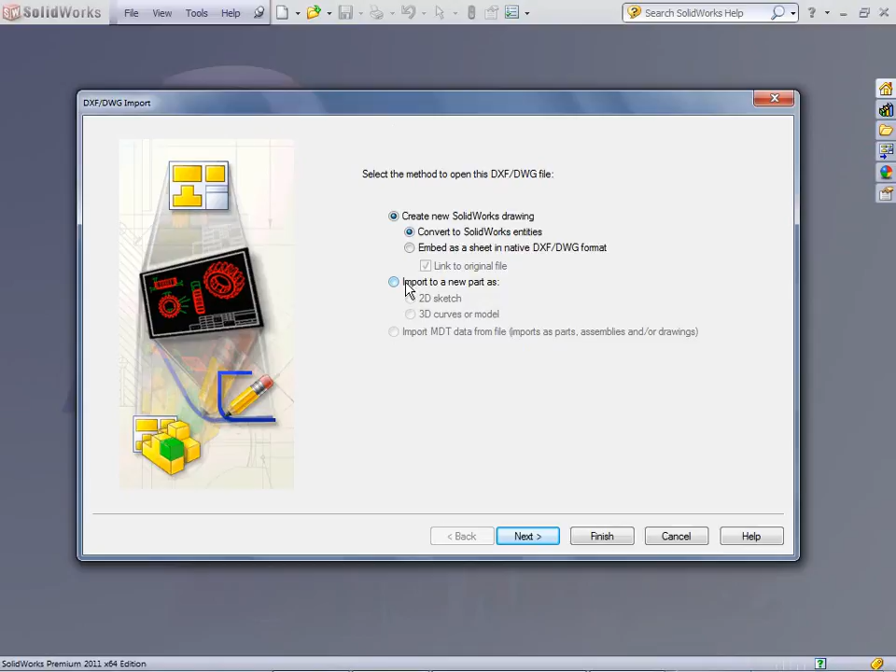The next thing I want to point out is some import options. So I'm going to open up a DWG file. I'm going to hit open, and of course if you do a lot of importing of DXF or DWGs, you've seen this dialog before - it's the import wizard. The enhancements have been made when it comes to importing into a new model.

So I'm going to import this DXF into a 2D sketch. I'm going to choose specific layers - I don't want all of them, in fact all I want is the 0 layer. This really hasn't changed much, this is about the same as it was in the past.

The changes really come here when I come into my options for importing. Okay, there's some options here - you'll see merge overlapping entities. What that does is essentially takes any overlapping lines that may be in the DXF DWG file and merges them to create one line. The problems were always in the past when I imported DXF is I could have 2 or 3 lines on top of each other.

And when I go to extrude a shape, it says that I have overlapping contours, when in reality I just have overlapping lines, which is essentially the same thing, but the software doesn't know the difference. So what's nice about this is it sees that, merges them to create one solid line, so I don't have to go in and delete line on top of line on top of line to get to the actual one I'm looking for. So that's a nice command to have on - merge overlapping entities takes care of any overlapping lines.

The next one, run repair sketch, really doesn't have anything to do with DXF or DWG importing at all. It's just a nice command when working in sketches. But what's nice about it is it detects small gaps in geometry, small instances of really anything, and it points out where I could have problems in my geometry, small dangling pieces of lines or things like that that could cause problems.

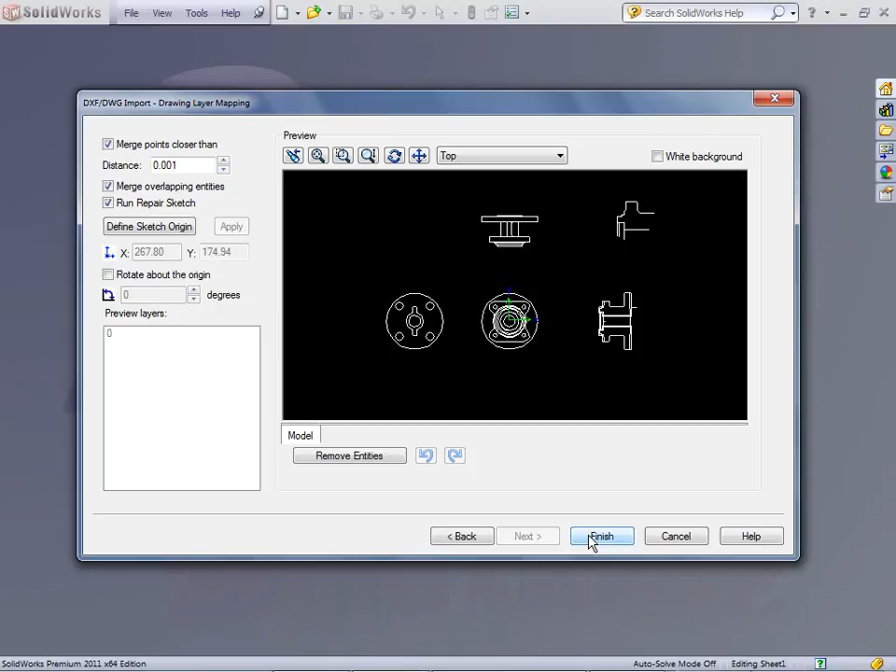So right there, okay, I hit apply and I just hit finish. No, I don't want to explode blocks.

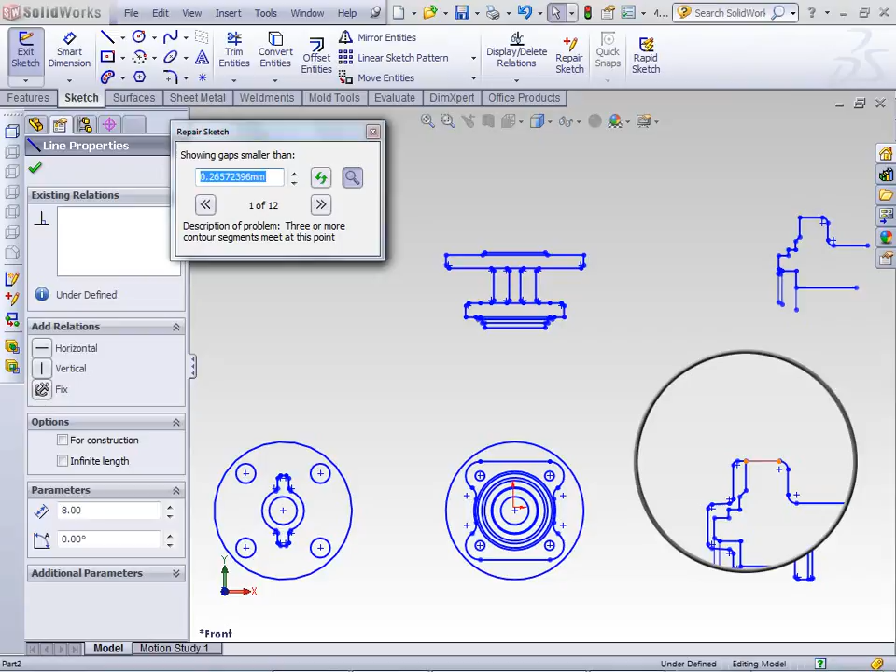You'll see it immediately pops up with repair sketch, and that's what that run repair sketch option does. What's nice is it automatically runs, automatically detects what issues I may have, and points them out. So I have 12 issues. Let me go through them and clean some of these things up.

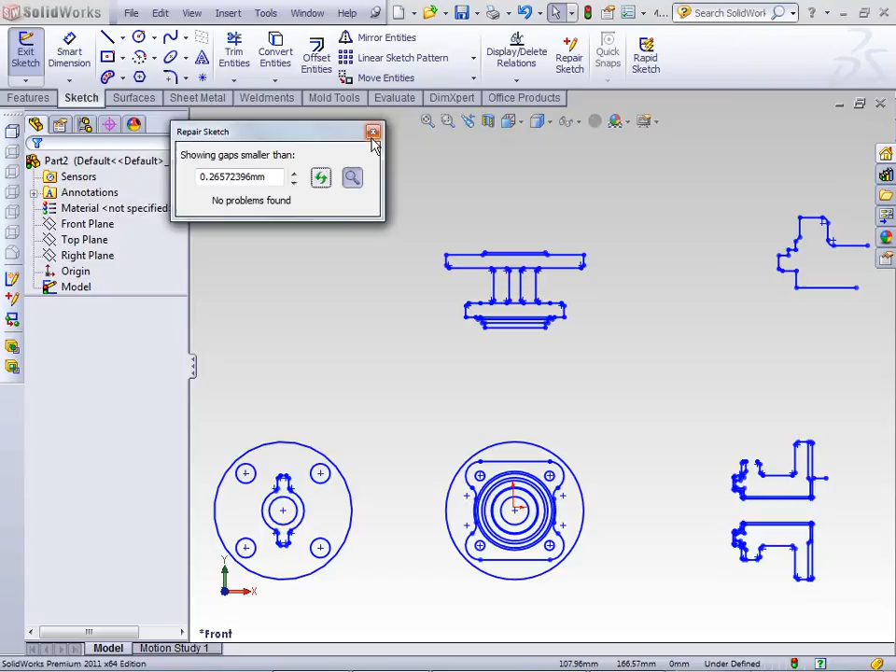Very quickly I can go from 12 problems to 0. Maybe I want to extrude with this, maybe I've got to add some extra geometry, who knows, but as far as the importing process and working with it and creating 3D models from your 2D data, this workflow is definitely improved with those new options. So that's working with the new DXF DWG import wizard.

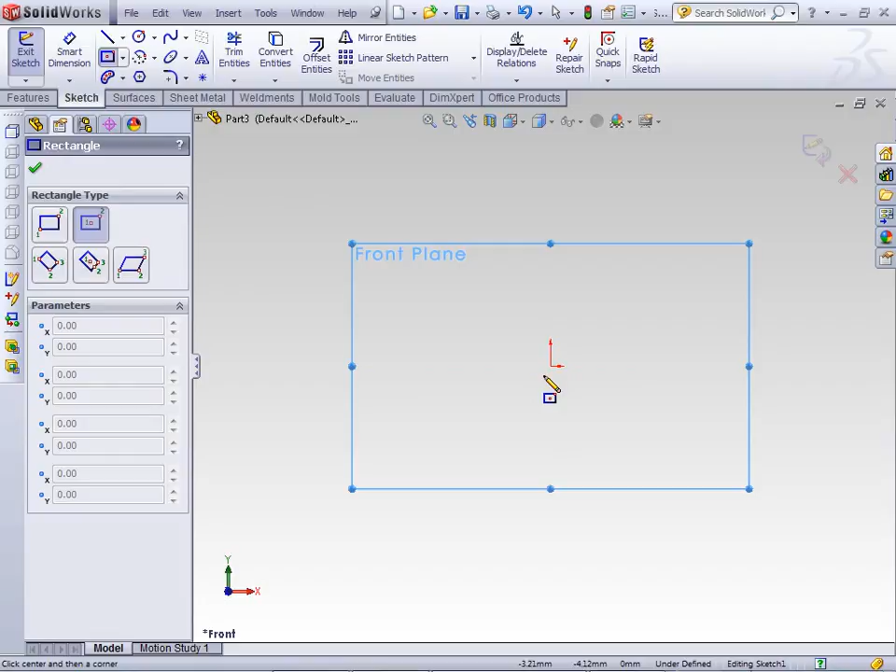The last thing I want to bring up when it comes to importing and exporting is this IFC compatibility. I'm just going to create a real basic model, and you have to forgive my ignorance on IFC. From what I understand, it's just a construction and building information file type, but for those industries, I guess it's fairly common. I just want to show the option.

I'm just going to create a real basic block. File, save as, set my save as type. You'll see right here, IFC 2x3. I assume if you're in those industries, you'll know exactly what that's for, and now we have export capability for it. So that is the new IFC compatibility.

Okay, so we have a little extra time. So what I'd like to get into are some of the other little tools that a lot of the other guys aren't going to have a lot of time to get into, in particular DFM Express and FeatureWorks.

The big change to DFM Express is its support for injection molding. In the past, the Express tool, which is free with every version of SOLIDWORKS, did not support injection molding. You had to get the Pro package to do that. With Express now, you have support for injection molding, and we can map to that one rule that's there. So it's definitely new functionality for 2011.

FeatureWorks has also been updated. There's been a lot of modifications when it comes to support for cut sweeps, support for drafts, really support for a lot more features in general. In the past, the FeatureWorks models we got were just a lot of bosses and cuts because it couldn't create a lot of these more complex features, and that's no longer the case. I can create sweeps, drafts, all the complex stuff that I couldn't do in previous versions. Let me show you a couple examples of these.

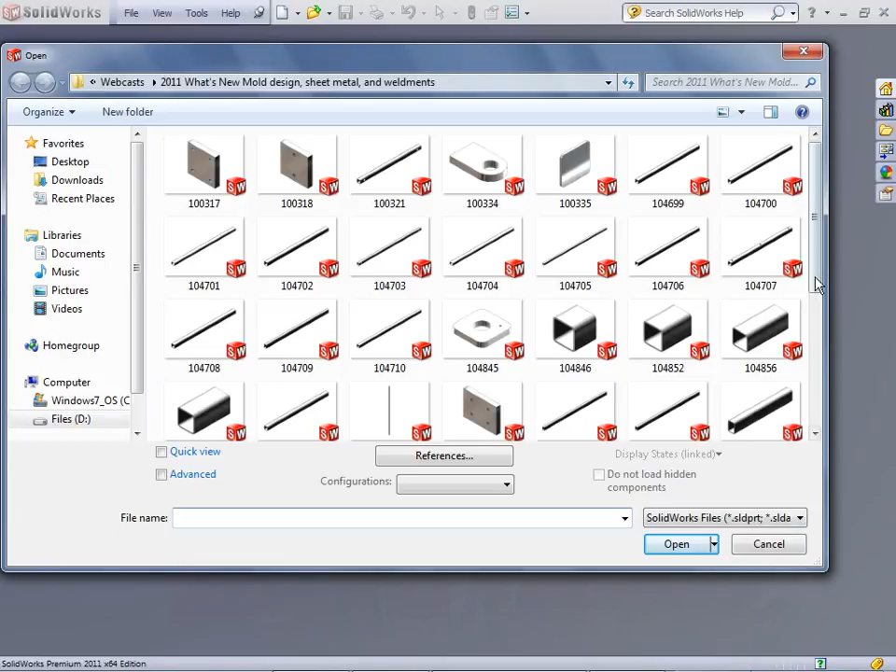I'm going to start off with DFM Express. I'm just going to open up a real basic injection part. Nope, I'm not going to run it for this one. Now, if you haven't used DFM Express, it stands for Design for Manufacturability. It's here in the Tools menu, and it's a very simple tool to use. It basically tests your model against a set of rules.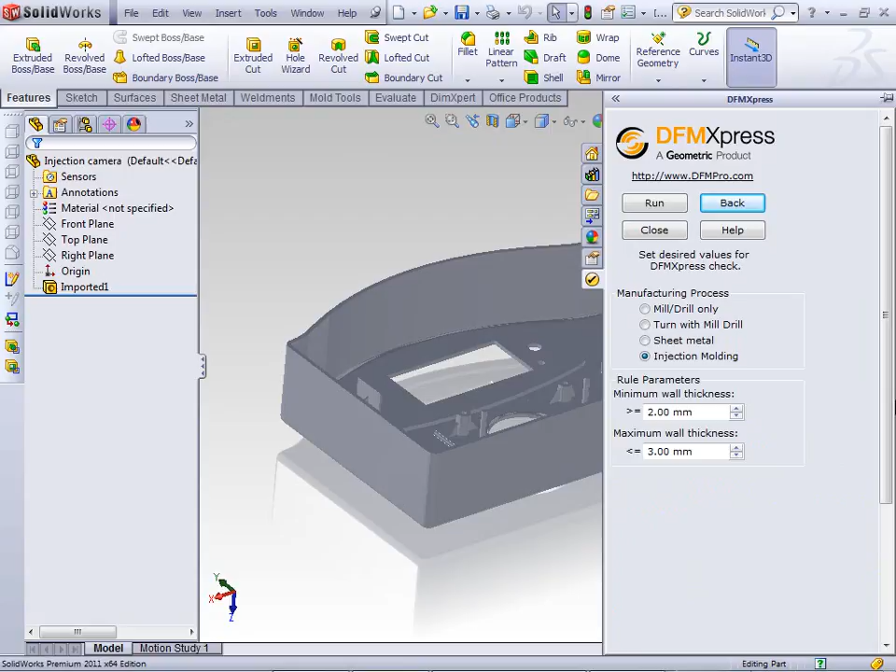Okay, so that's new for 2011. I'm going to check injection molding, and you'll see the rule that pops up. There's two rules, minimum and maximum wall thickness. And really what I'm specifying is between this and this value is an acceptable wall thickness. Anything outside of those, it is a broken rule, and I want to see it.

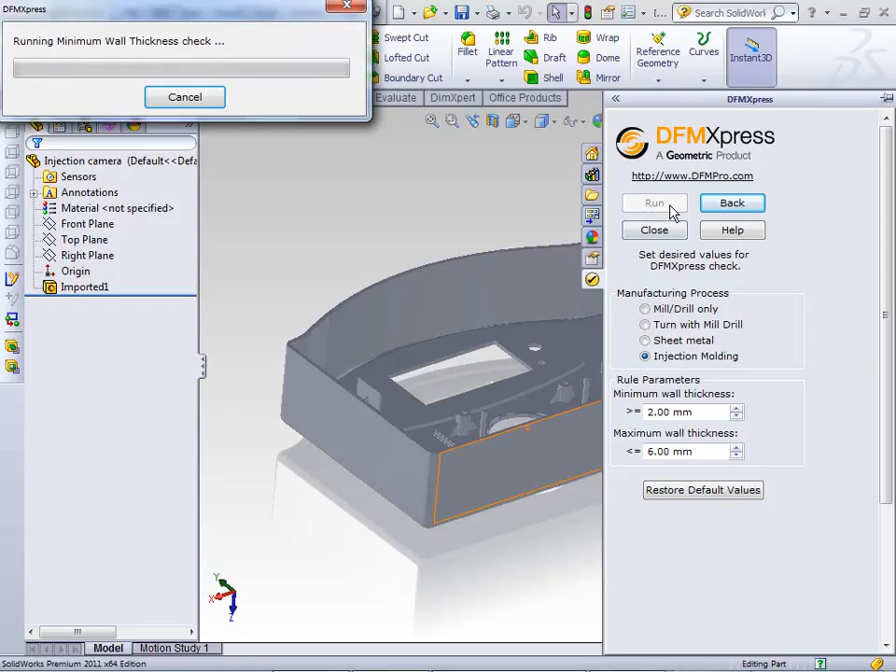Okay, so I know that the model is intentionally designed for up to a 6mm wall thickness, so I'm going to go ahead and set that to 6 and hit run. And really that's all you have to do. Set your rules, you hit run, the software analyzes the model, and then tells you anywhere where those rules were broken. And if you haven't used this, there's a lot of different manufacturing scenarios where you could use it.

But you'll see there, as soon as it's done analyzing the model, it pops up with all the rules failed and the rules passed. And if I go into specifics, you'll see there are a couple instances where the wall thickness, see here, maximum wall thickness is 7, whereas it's recommended to be less than 6. So it's showing me every instance where the wall thickness is more than 6, and there are a few.

Okay, so it's a nice tool for those working in the injection molding area where they're creating their plastic parts and they need to be really concerned with constant, continuous wall thickness. Okay, so that's some of the improvements to DFMXpress.

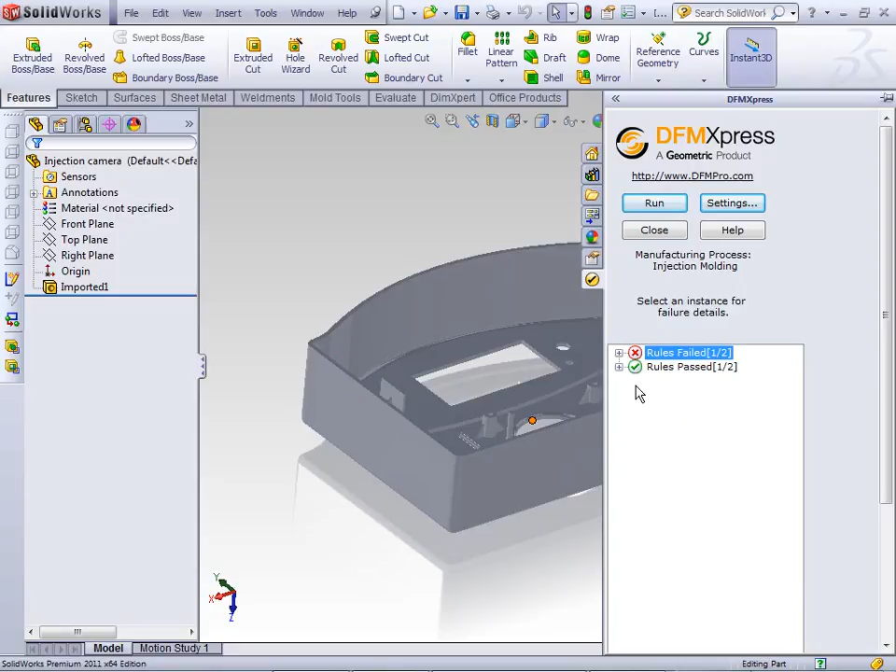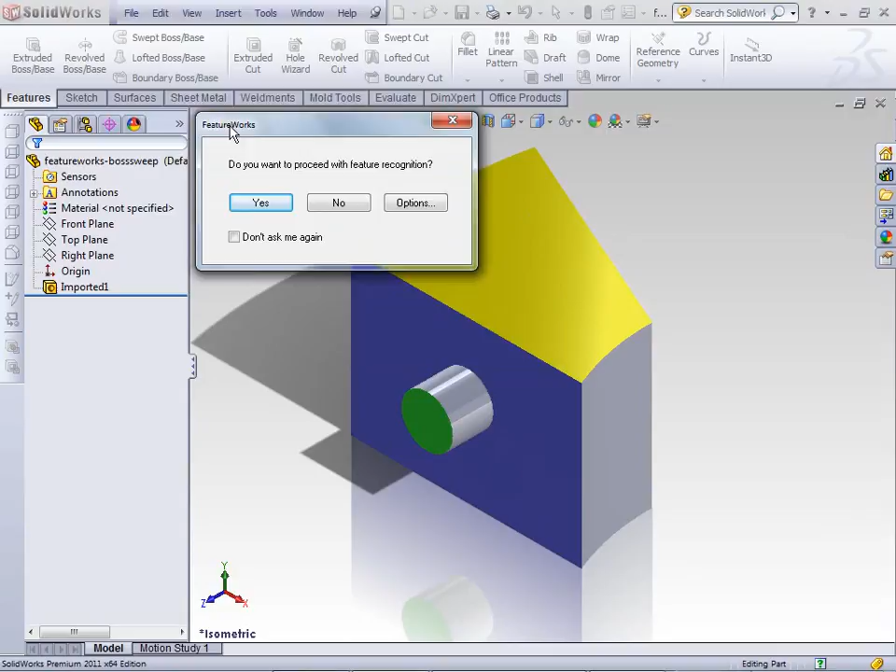The last thing I want to bring up is FeatureWorks, and I'm going to import a couple of Parasolid models. Let's start with the boss sweep and show some of this new capability for FeatureWorks. So yeah, I'll run import diagnostics. Do you want to proceed with feature recognition? Yes. Let it call up FeatureWorks.

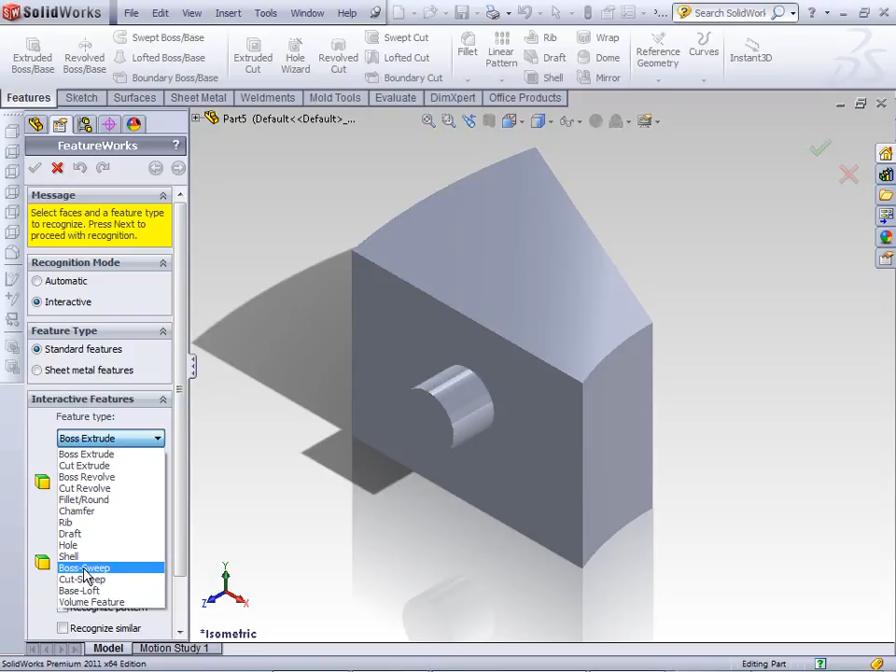And the thing I want to point out is in the past, when I did an interactive feature recognition, it did not have options for cut sweep, boss sweep, a lot of these more complex features. Okay, with 2011 I can now support things like boss sweeps, cut sweeps, draft features. So I'm going to go ahead and define a boss sweep, and I just select the two faces that represent the sweep, both top and bottom, and then I just hit OK.

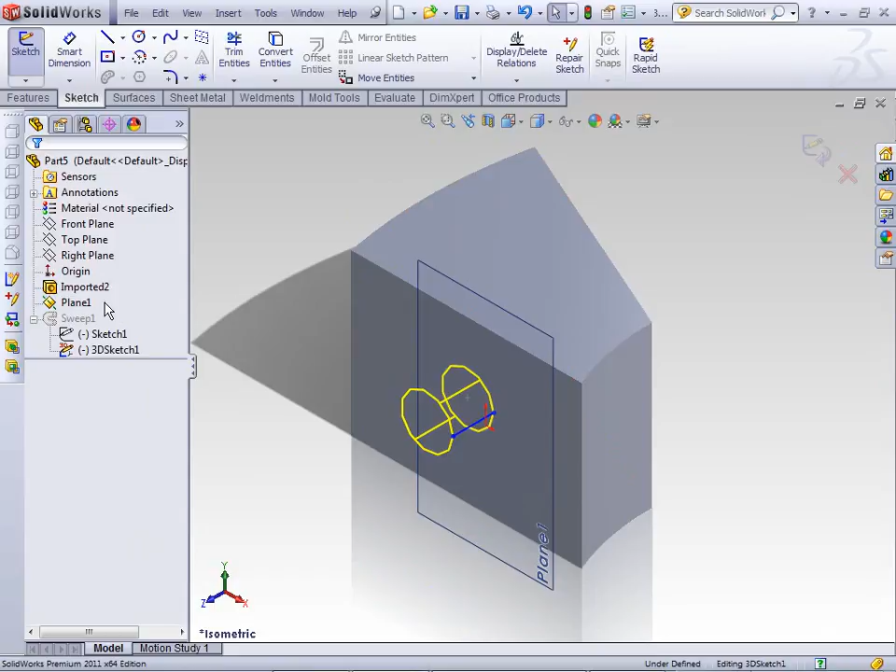And you'll see what it creates is a feature complete with sketches that I can edit. Okay, and that's really the key to all this, is I want to create something I can edit. Okay, so this is working again with imported geometry, creating features out of it so that I can manually edit, make some design changes. Okay, so that's creating boss sweep. Same thing with a cut sweep.

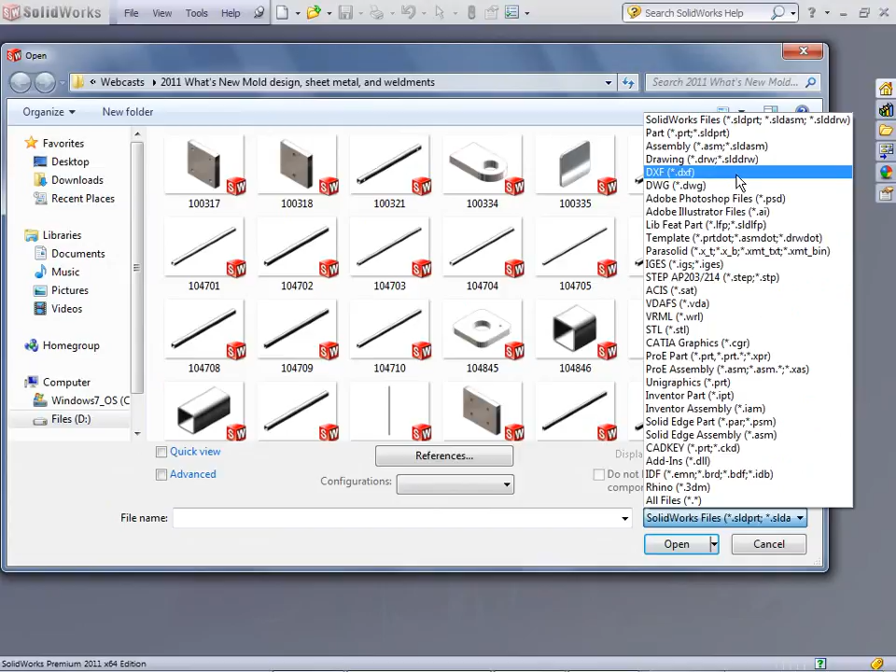So I'm going to go ahead and open up a model and show you an example of the cut sweep. Really, the steps are the same. For inserting a boss sweep and a cut sweep, I have to define the feature type first. So I define a cut sweep. Then I define the two face sets, so the top face and the bottom face of the sweep. And I just hit OK.

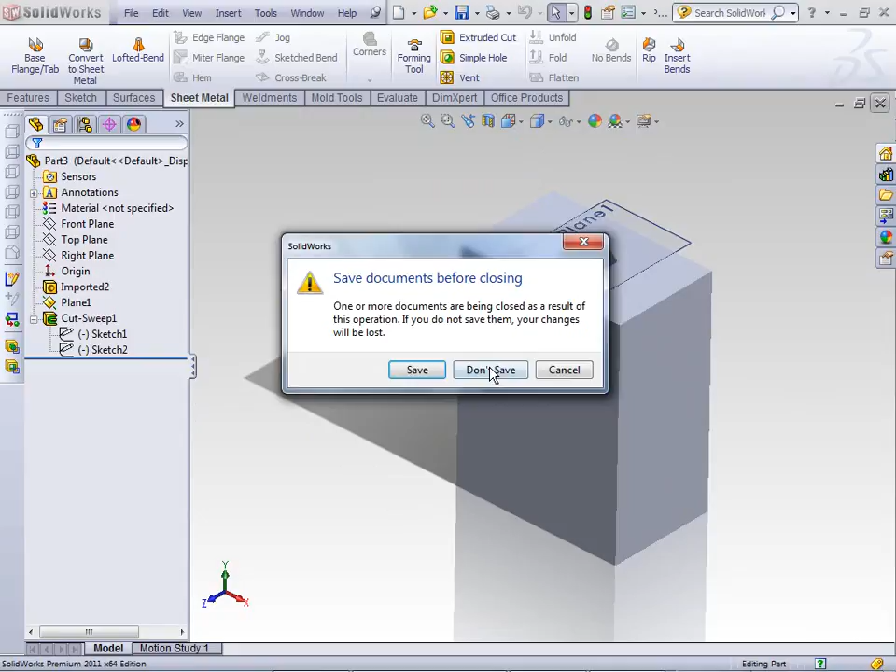And it creates a cut sweep again with two sketches. Sketch 1 and sketch 2. Okay, so again, that's creating cut sweeps with imported models using FeatureWorks. The last one I want to point out with FeatureWorks is draft. That's always been a limitation with FeatureWorks in the past, is it would not pick up any draft. So I'm going to go ahead and call up an example.

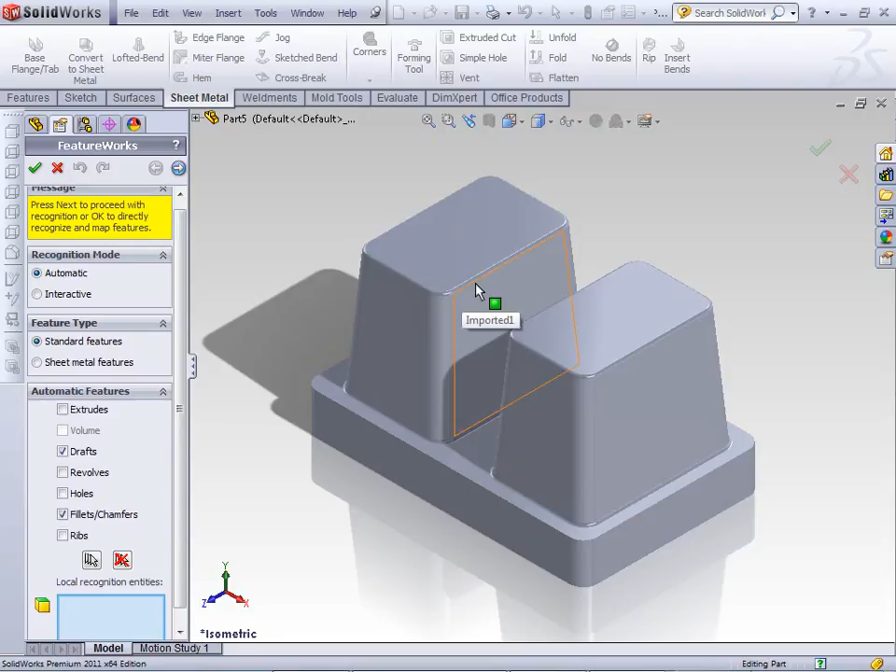Now with draft, what's nice is I don't have to run it in interactive mode. It will automatically pick it up. As long as I shut off some of these other features, I only want to pick up draft and fillets and chamfers. You'll see it's got a couple of fillets here as well. I wanted to detect those as well.

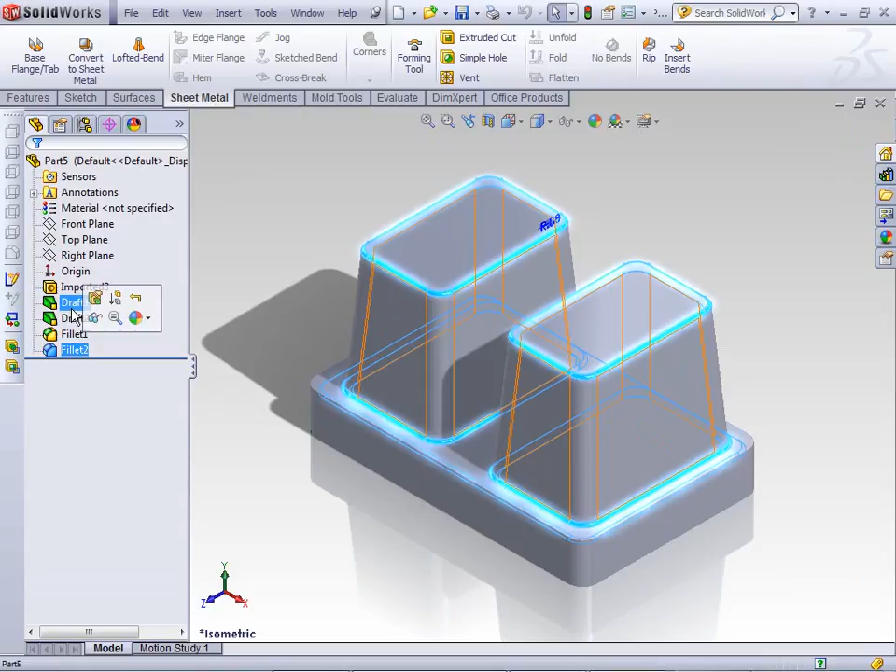So I'm going to go ahead and set it just to drafts and fillets and chamfers, and go ahead and hit next. You'll see it runs through the recognition, and then what it's going to do is give me a list of features that it recognizes. Okay, I go ahead and hit OK, and it adds those features to my model. Okay, so you'll notice draft 1, draft 2, fillet 1, fillet 2, all features I can edit and change now. Okay, so now working with draft and FeatureWorks is definitely a reality.